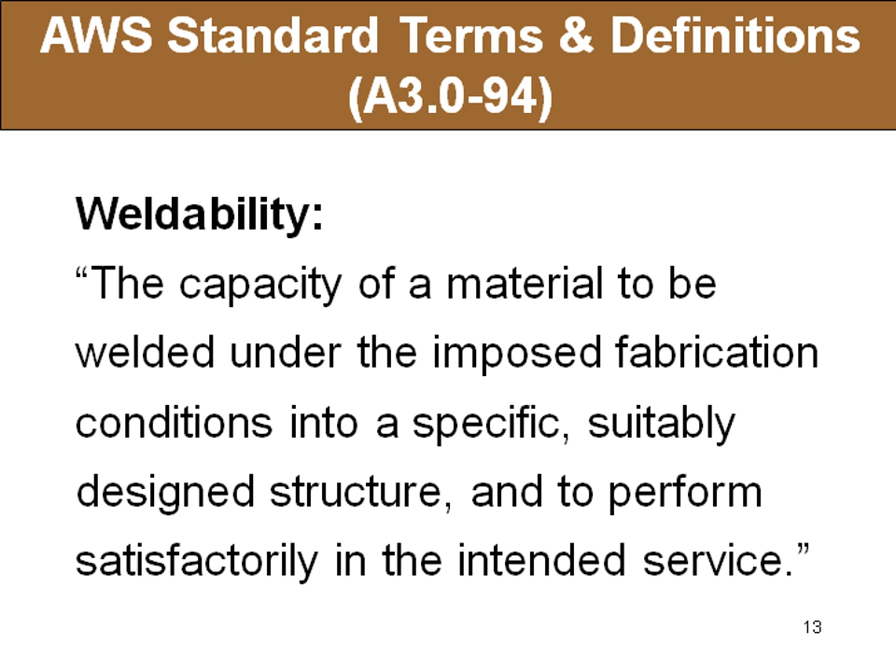The American Welding Society has a committee that writes a document called A3.0. And before I read this definition, I'll tell you I don't particularly care for it. Nevertheless, it reads as follows: the capacity of a material to be welded under the imposed fabrication conditions into a specific, suitably designed structure and to perform satisfactorily in the intended service. Now, I'd like to suggest that we usually don't add a fitness for service component into the use of the term weldability. And yet this official definition from AWS does make fitness for service part of this definition.

I prefer the definition that comes from ASTM. ASTM defines weldability as follows: a term that usually refers to the relative ease with which a material, a metal, can be welded using conventional practice. Now, with that definition in mind, let's go on and evaluate what constitutes weldability.

Now, weldability is driven by the chemical composition of the material. Carbon is a critical ingredient in determining weldability. The effect of carbon is compounded by the effects of alloys that are present in the material. Now, weldability is directly related to the term hardenability, and hardenability is a term that the metallurgist uses when defining heat treatment of a steel. And steels with high levels of hardenability are able to achieve high hardnesses very easily.

And in welding, we really don't want the steels to get to high hardenability. We prefer steels with lower hardenability. We prefer low carbon steels, low alloy steels for good weldability. So if you will, weldability and hardenability are inversely related.

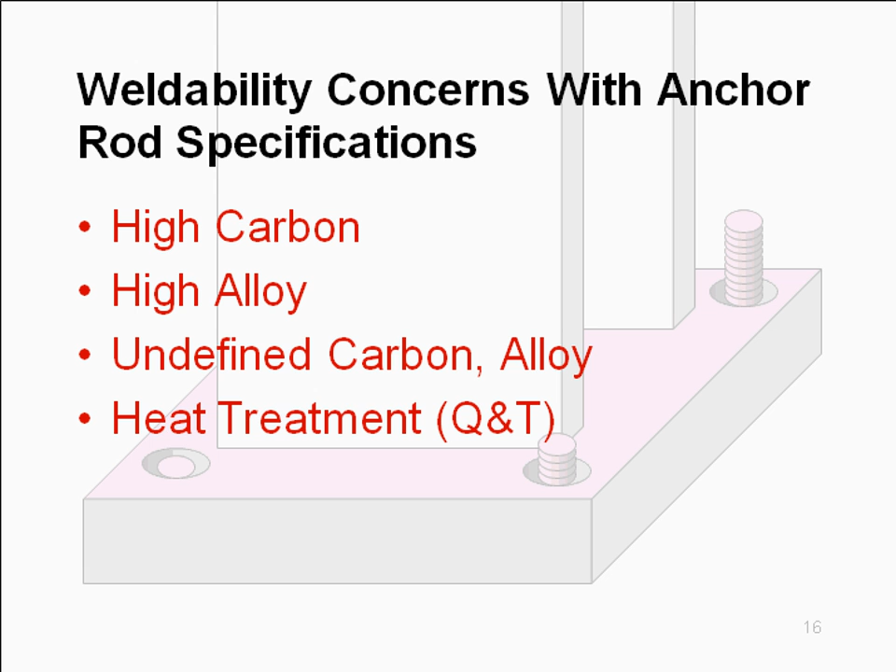Now, for today's discussion, I'm going to use F1554, which is the preferred grade for using or making anchor rods today. When you look at 1554, you'll find that there are 3 different grades of anchor listed, grade 36, grade 55, and grade 105. Now, grade 36 has a name that kind of implies it would be like A36.

And indeed, if you look at the chemistry in 1554 grade 36, it's very much like A36 steel. And you, of course, know A36 is a highly weldable material, and so you would tend to have a lot of confidence when you looked at grade 36.

However, there's a footnote, and the footnote says that for rod diameters up to 3/4 inch, the manganese content is, quote, optional with the manufacturer, but shall be compatible with weldable steel. Now remember, when we said weldability, we did not define that in terms of whether you could or could not weld the material. We decided it had to do with the relative ease with which you welded the material.

Now, this definition in the footnote talks about weldable steel. It doesn't talk about how easy it is to weld it. And frankly, I'm not sure what it means that the manganese content shall be compatible with weldable steel.

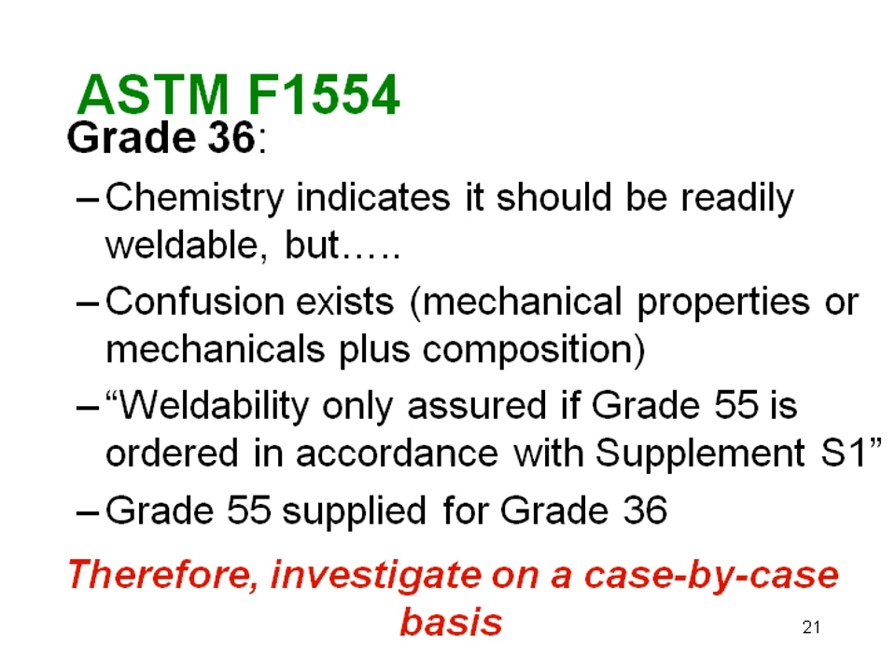When we go to grade 36, we're essentially in the same boat as grade 55, because we might have that substitution. We have no limits on chemistry. We have this note that says it's not assured to be weldable when we order it other than with supplement S1. I come to the conclusion that, once again, investigation on a case-by-case basis is required.

Now, grade 55 that's ordered in accordance with supplement S1, there I should have pretty good confidence that my weldability is going to be fine.

Dwayne, if I can interrupt real quick, we do have a question. The question is: how can material that did not have the S1 specification at purchase be checked if this is met? Oh, that's an excellent question.

To comply with supplement S1's chemical requirements, the rod could be analyzed by a materials lab to get your chemistry and your alloys. You could see if it does or doesn't comply with those limits of the specification. And then there are the carbon equivalency equations, listed in the ASTM specification, that you could calculate. By making those checks, you could find out if material that was not ordered in conformance with supplement S1 actually did, in fact, comply with supplement S1 requirements.

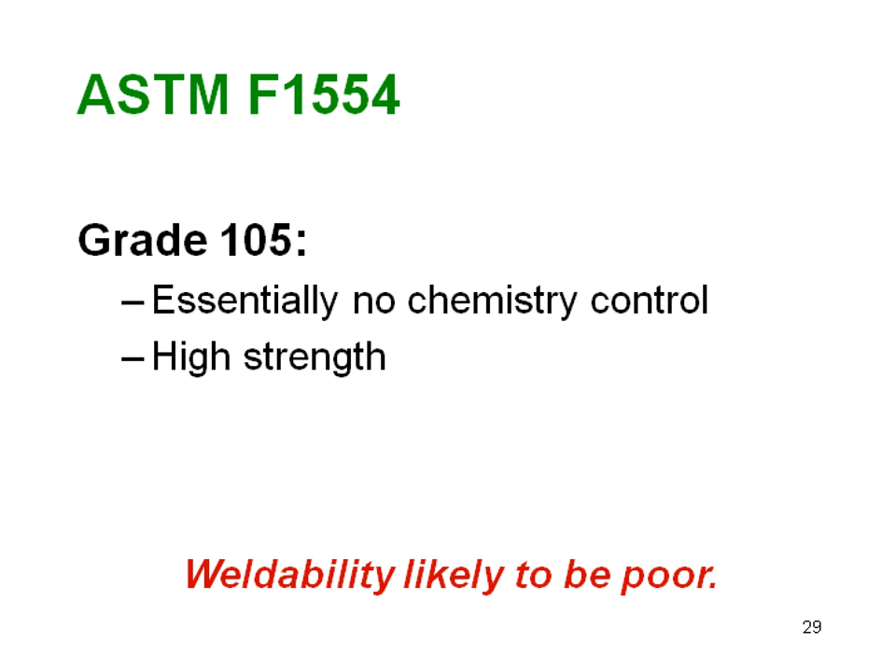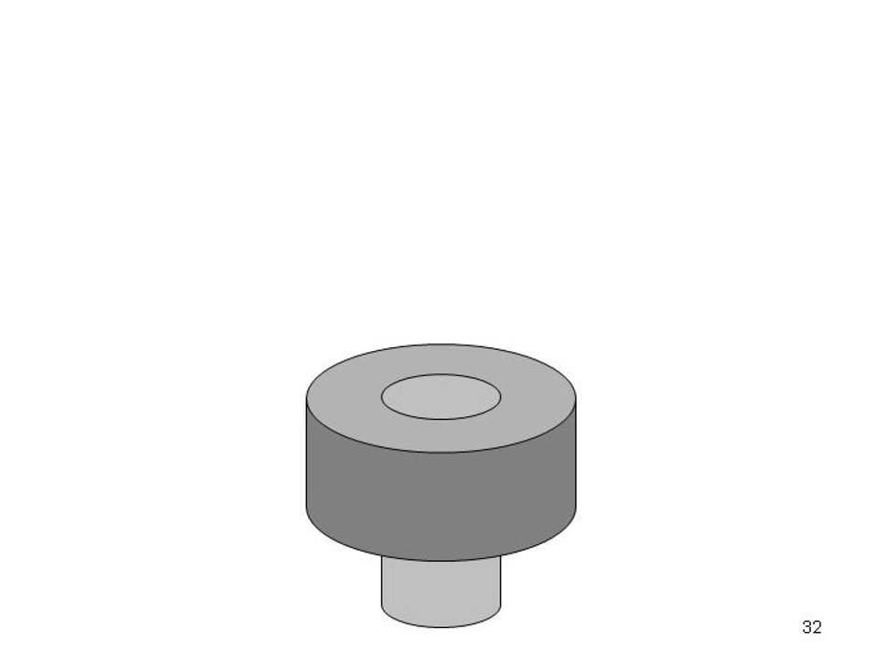We bring in the extension. Now, the extension should be selected from good weldable materials so that we don't have any problems with the extension. We take the extension and grind it to a chisel point, not a pencil point, but to a chisel point, and then bring that into an alignment.

Now, at this point in time, I think you can start to see the role that that washer or that donut's going to have. It's going to act as a support for the liquid weld metal. It acts as a bit of a starting tab and a bit of a runoff tab. And a bevel groove weld in the horizontal position is hard to make. That acts as a shelf to support the liquid metal a bit.

And so then we go in to start the welding. We weld from one side. We could be alternating sides. I'm not going to complicate the discussion with talking about welding on either side.

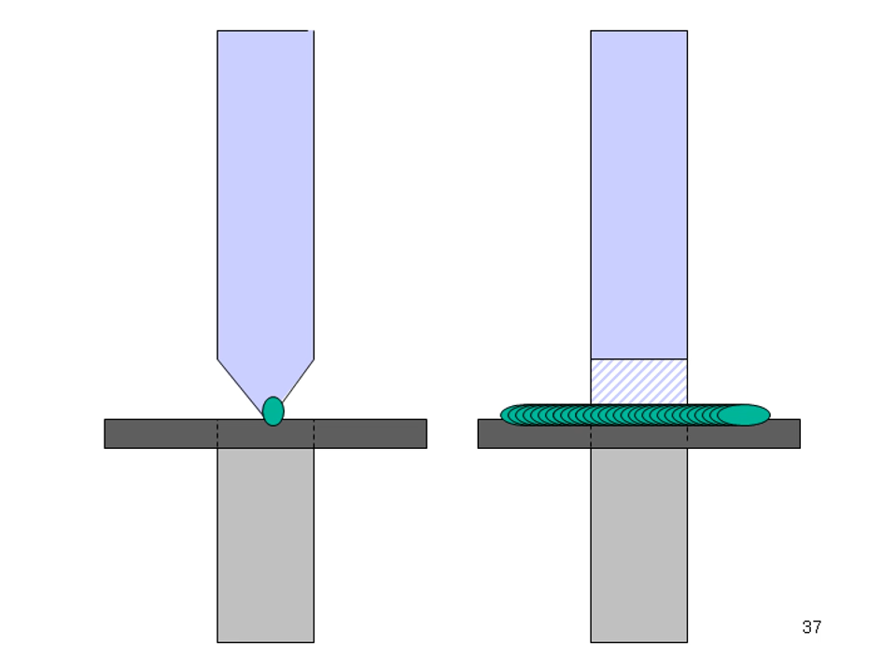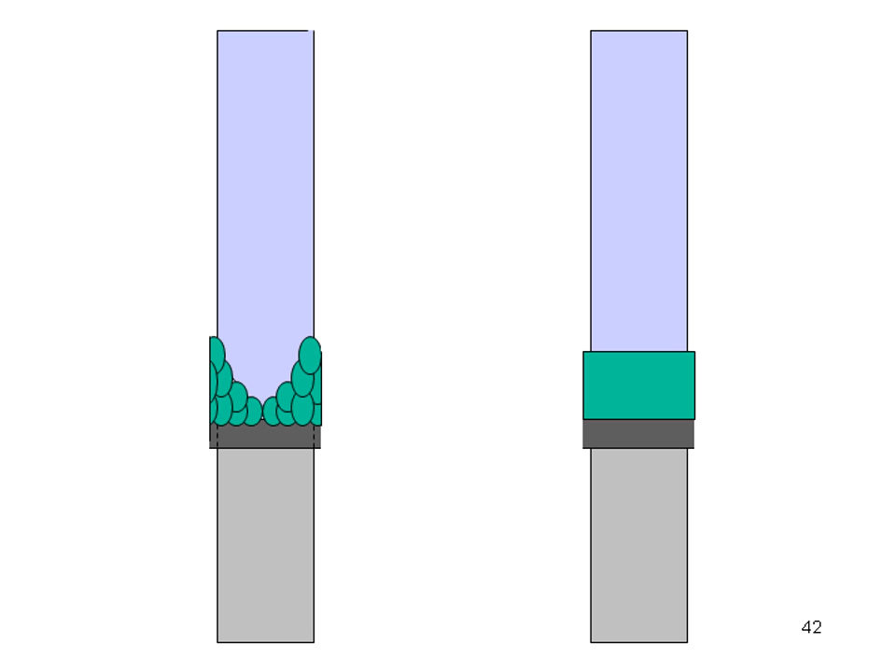Let's assume we get one side welded up. We go to the opposite side, gouge the root. This is making sure I get complete fusion across the full cross-section of the rod. Weld up the second side, and now it's time to start cutting off auxiliary pieces of steel and then grinding that flush so I get a good sound extension and I don't have any weld discontinuities, and I have a smooth surface. Well, that's how I can weld an extension in place.

Of course, it's really tempting for somebody to look over in the corner and see their welding machine, and particularly for these anchors that are too short, they want to make a plug weld. Now, we'd like to discourage that. Number one, we don't have design capacity values for plug welds in tension. We normally look at those as in shear. There would be a tremendous influence of the base metal composition on the weld metal composition, and getting a good sound weld under those conditions would be very problematic.

Of course, we had the other situation where perhaps you couldn't get full engagement of the nut in place. Once again, it's very tempting for somebody to want to get their welding machine and put a little plug of the anchor to the nut. Now, again, in the design guide, we have a segment on welding on various nuts. Nuts are usually not good materials to be welding on, and this detail would be somewhat problematic as well.

Now, having made this presentation a few times, a frequently asked question is about the other end of the rod and welding on nuts. You should know that L rods and J rods are not the preferred approach, and rather we want straight rods with a nut on the end to keep that nut from spinning off.

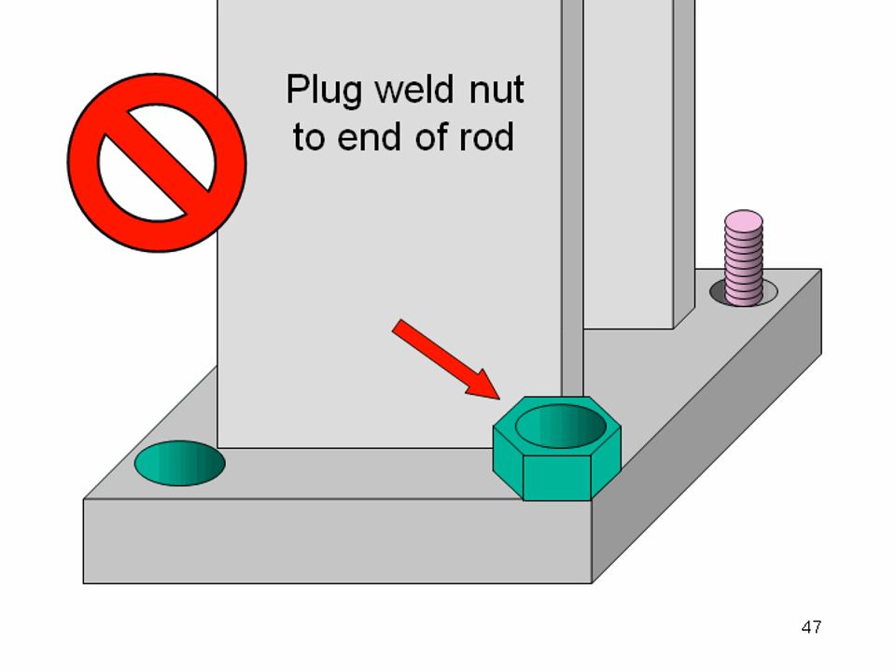Well, we're down through one topic now, and that was extending anchor rod. Now I'd like to switch to the opposite situation, and that's when people want to weld anchor rod directly to base plate. This is when we have just the opposite problem, that is the rods are not set in the concrete deep enough. Now, of course, you need to make a little investigation to make sure you have enough engagement to even get the strength out of the anchors that you're looking for.

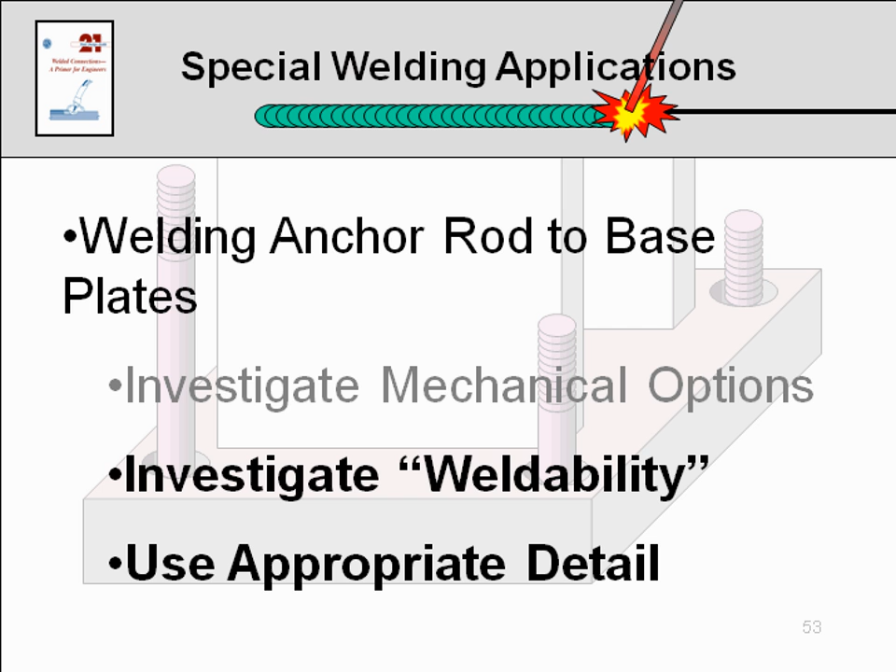And here we start the list the same way we did before, and that is investigate mechanical options. Now, in this particular case, we usually have mechanical options that we can utilize. We can put a stack of washers in place. We can make a pipe washer, if you will, if it doesn't make sense to have a big stack of washers for the connection. But if you don't want to do that and you want to go into welding, well, once again, we start the list with investigate weldability, and we're going to do that the same way as we did before.

Now, having investigated weldability, we need to use the right detail. This is typically not the right detail. Of necessity, there's a clearance between the diameter of the rod and the diameter of the hole. There will be a gap at this location. That gap is going to make it problematic getting a good weld. Predicting the weld throat with gaps is a little bit more of a challenge.

Rather, we'd like to suggest a detail that looks like this. Now, once again, we've cut a donut out of a good, high-quality steel that's easily welded. We've made the ID precisely the same as the anchor rod, so we have a good, tight fit of that donut to the anchor, and now we can put a weld around that location without problem. Now, there's no need to weld the donut down to the base plate. There might be some temptation to do so, but we're just going to be transferring some restricted loads through that connection, and we don't really need to tie all those components together.

Well, having gotten through the anchor rod, I think we have a question on anchor rod. Yeah, before we move on, the question was, what if the welded area of the extension is where the nut needs to end up?

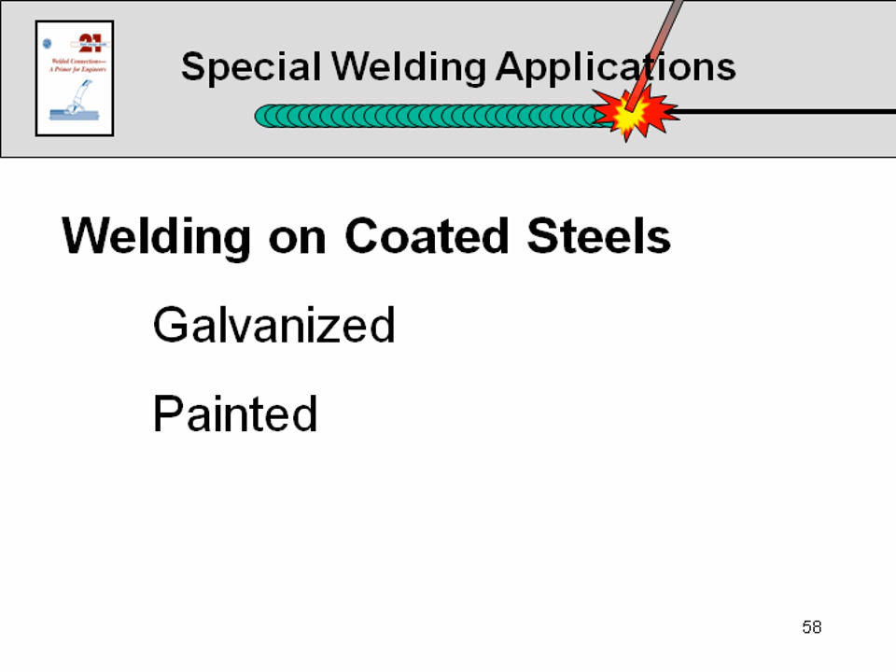Before we go into more detail, let's look at what our specification already says. If you look at the banner at the top, this is right out of the 13th edition, the 2005 spec, the Joint ASD-LRFD specification. When I look up the topic of shop painting, I read: unless otherwise specified in design documents, surfaces within 2 inches of any field weld shall be free of materials that would prevent proper welding or produce objectionable fumes. Now, if I go to section M4, I read this: shop paint on surfaces adjacent to joints to be field welded shall be wire brushed if necessary to assure weld quality.

Let's see what AWS D1.1 says on this issue, taken up in section 5. 5.15 reads as follows: surfaces to be welded and surfaces adjacent to a weld shall be free from loose or thick scale, slag, rust, moisture, grease, and other foreign material that would prevent proper welding or produce objectionable fumes.

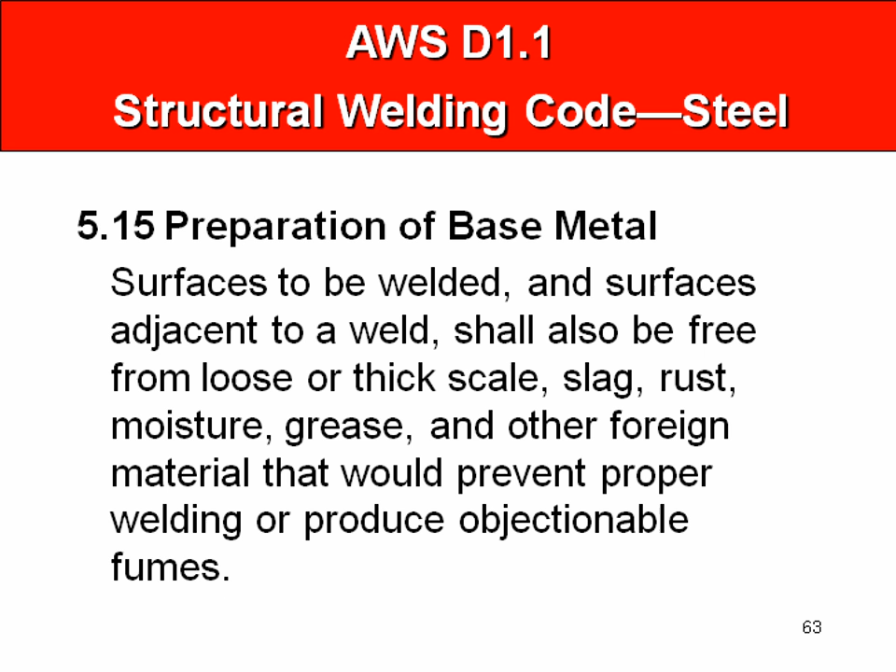Now, most of our specifications and provisions deal with input requirements. We say that the steels can be of these grades, the filler metals can be of certain grades. What you don't find here is paint of a certain mil coverage or galvanizing of a certain mil coverage can be welded on without concern. You don't see a requirement that says if it exceeds this level, you have a problem, you've got to remove it. Rather, what we're looking at is outcome-based criteria which says if the weld quality is affected, you can't do it.

Now, this practically means you make a weld and you inspect it to see if it's okay. And if it's not okay, you're going to have to do something different. And if it's okay, you go ahead with it. That's what I mean by outcome-based criteria.

Now, there is this ongoing discussion about safety. In Design Guide 21, there's a brief chapter 15 on weld safety. The most important thing contained in that chapter is a reference to Z49.1, the ANSI standard on safety in welding and cutting and allied processes. You can obtain a free copy of Z49.1 by going to the AWS website, aws.org, and download it to your hard drive.

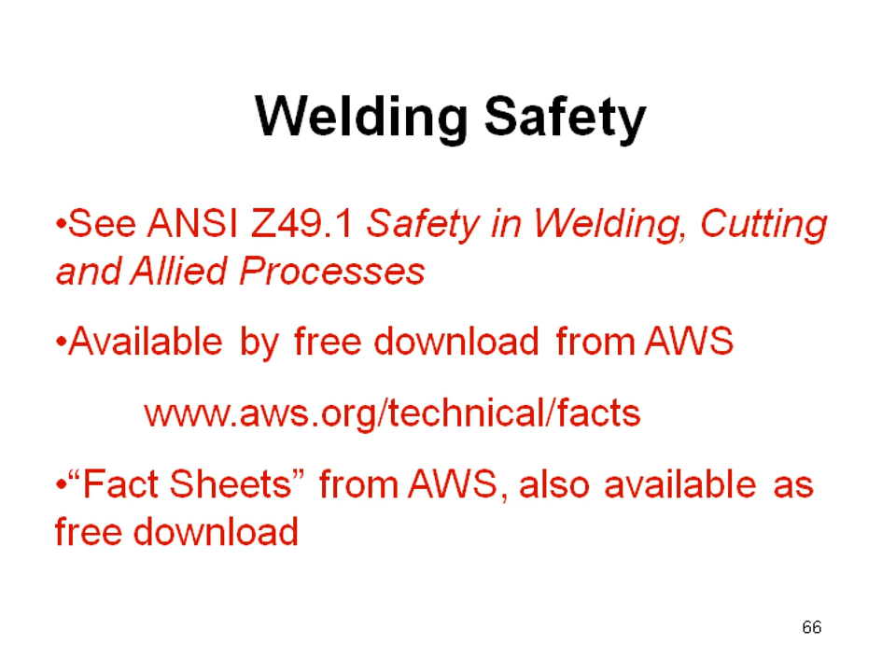For example, fact sheet number 1 addresses welding fumes and gases. The next fact sheet here happens to be fact sheet 25, which deals with the topic of metal fume fever. If you read with me, you'll see that metal fume fever is an illness caused primarily by exposure to zinc oxide fumes in the workplace. The main cause of this exposure is usually breathing fumes from welding, cutting, or brazing on galvanized material.

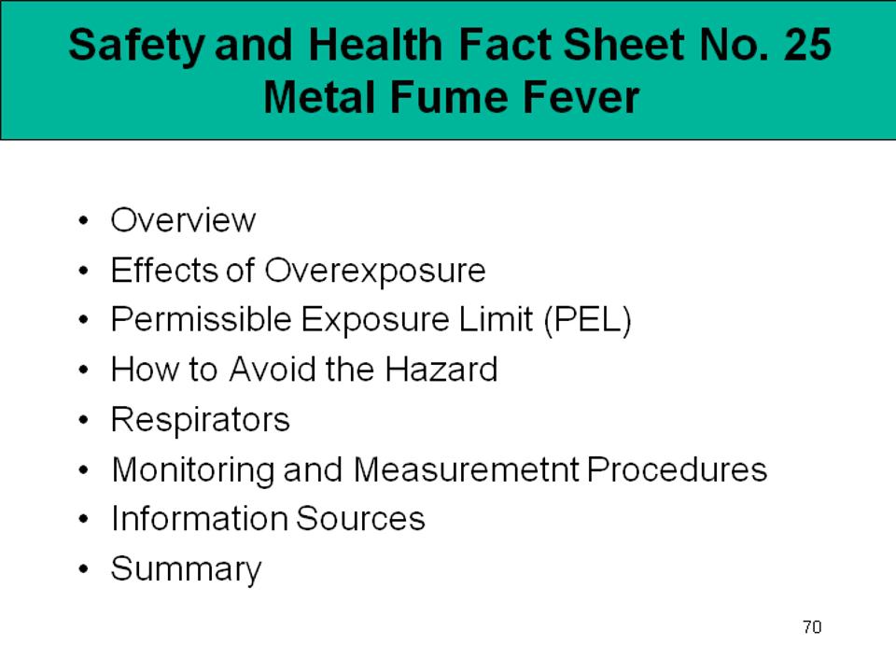The point here is if we're welding on coated materials, if you're welding on galvanized materials, here are some sources of information to address the welding fume side of the discussion. The American Welding Society's fact sheet 25 outlines the material covered in that document and gives some good, helpful information. This is the same information I just read, but perhaps in a format that's easier to digest. Practical advice is given.

Keep your head out of the fumes. Don't breathe the fumes. Use enough ventilation. Exhaust the arc to keep fumes and gases from your breathing zone and the general area below any limits. It also gets into TLVs, material safety data sheets, and those kinds of issues.

I'd like to switch gears now and go back to the issue of weld quality, but I guess before I do that, we have another question. One question that came in is: what are some possible solutions to inspecting welds once they've been painted over?

The question is how do we address the issue of welds after they've been painted over. I politely want to say that's really not what we're talking about here. We're talking about painted surfaces and welding on those painted surfaces. D1.1 will tell you you need to inspect the welds, and I think you'd find the implication there, if not a specific statement, that you're going to inspect them before it's painted over. You really should be inspecting it before it's painted. I would expect that heavy paint could mask discontinuities.

In fact, I've seen a couple of projects where we had products that were actually dipped and had a very heavy layer of paint over the welds that made inspection impossible. So there may be some paint removal that has to be done in order to apply a good visual inspection. Okay, I apologize, Dwayne, I think I may have misstated the question.

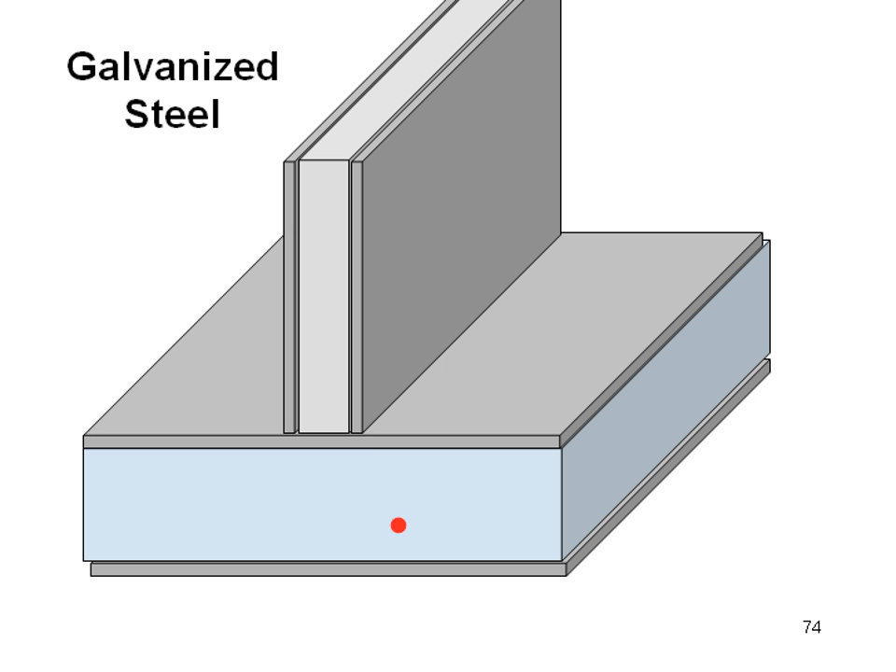This illustration is trying to show a piece of galvanized steel, and I've tried to use different colors to show that the virgin steel is underneath this coating of galvanized. When I go to make a weld, it is possible on a very heavy galvanized part to fuse the weld metal to the galvanized coating, but for the weld to actually not fuse to the steel. If that's the case, the strength of the connection is dependent on the strength of the galvanized coating, and that's not what you want to do for the design of your elements. That's not what we've assumed. So you have very little strength if you're not penetrating through the galvanized coating.

I'd like to suggest that's probably less of the problems, a less frequently encountered problem. The more likely problem is that you will have extreme porosity in the weld. When you heat the galvanized coating, it actually sublimates, going from a solid to a gas.

If you've ever welded on galvanized material, there's a lot of fume that's generated, and that fume percolates through the weld. If it solidifies while going through the weld, you can end up with holes in your weld. Now, for structural applications, we do have acceptance limits for porosity. We're allowed to have some. We're not allowed to have a lot.

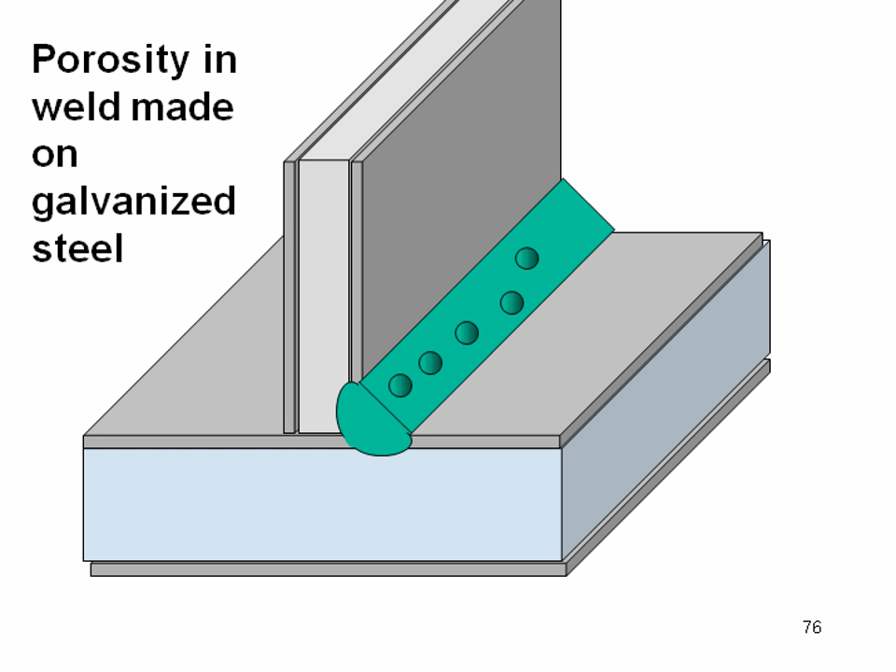And so that may be one of the problems you encounter. The other problem is that you may introduce zinc into the liquid weld metal. If you do that, the zinc with a different melting temperature may segregate during solidification and cooling. It may go to grain boundaries, or it may go to the center line of the weld, and we could get into a crack.

Now, cracks are the worst thing that we have when we try to make a weld. And so we need to preclude the cracking tendency in particular.

Now, the American Welding Society has a publication that's now obsolete, D19.0. It was last updated in 1972. I don't know if it'll ever be updated again, but in this publication is a list of factors that affect cracking tendencies on galvanized steel. The factors include the silicon content in the weld metal, the degree of penetration of the weld beyond the root, the thickness of the base metal which affects restraint, the coating thickness of the zinc, and the microstructure of the zinc coating. What I take from this list is there are a lot of things that affect cracking tendencies.

Nobody said our job was going to be easy, but we have a lot of variables now that we have to deal with. So I want to be practical. I want to give you some good information because you have a job to do, and you have a structure that's going to be galvanized, and you need to weld on it, and you want to be certain that you're going to get the strength out of the connections you're looking for. So here are my suggestions for critical applications.

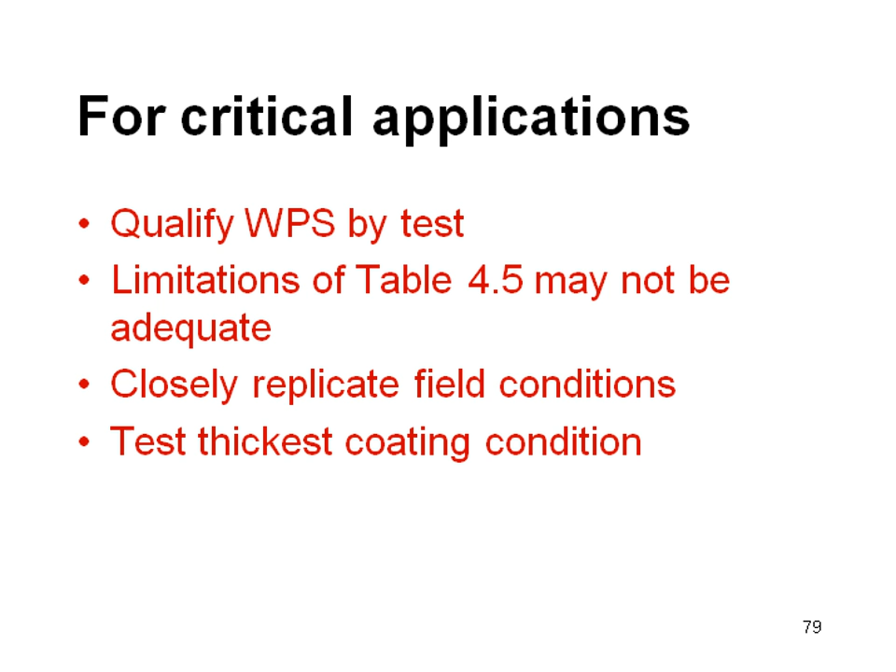Well, I'd like to move now on to our fourth topic, and that's welding on heavy shapes or on heavy sections.

Some of you know about the project and the cracking that was experienced at the Orlando Civic Center in the late 70s. These were not service loads. The truss, which was made with a chord that was a very heavy jumbo section—of course the bottom chord is in tension—and for the convention center, it spans quite a length because you want column-free convention floor space. While this structure was being erected in the middle of the night, one of the chords fractured.

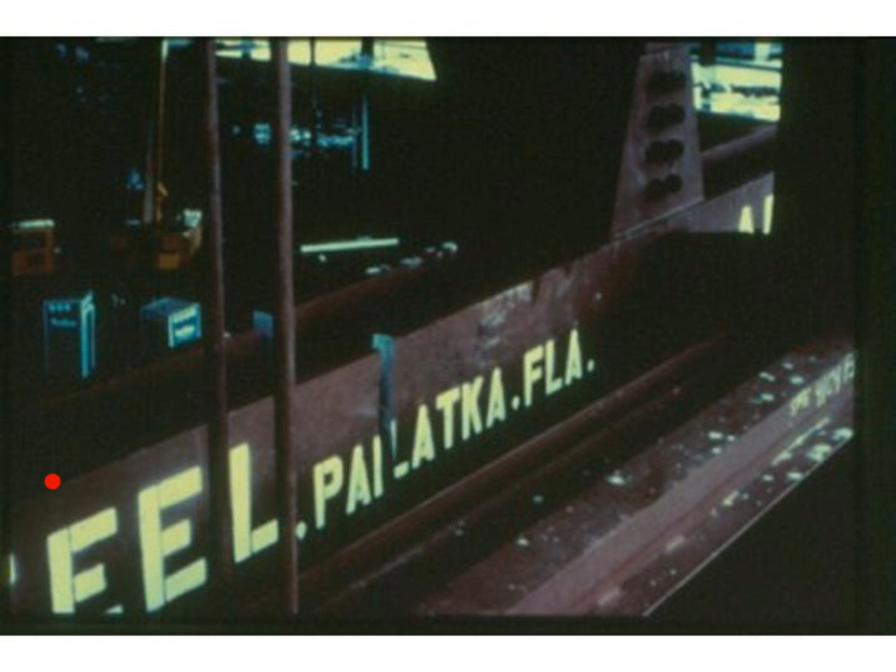Now, the first thing I'd like you to notice is that the weld itself did not fracture. This cracking is occurring in the base metal. Admittedly, it's cracking that's welding related, but we need to make sure that we start by understanding that it was the base metal that was fracturing.

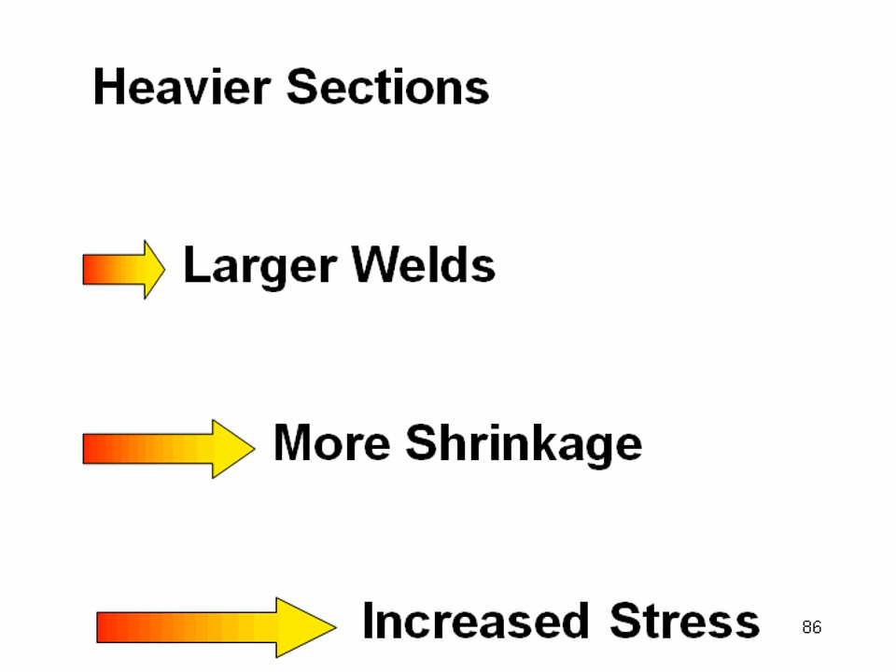Now, when we start welding on these heavier sections, what happens? Well, we start making larger welds. Larger welds have more shrinkage. The increased shrinkage means we're going to have more residual stress in these connections. Heavier sections are also more highly restrained. The higher restraint is going to create more triaxiality, and as we're going to see, more triaxiality leads to less ductility.

Finally, as I'm dealing with heavier shapes, the materials themselves change. There's less rolling associated with making the heavier shapes. They cool more slowly since we have thicker flanges and thicker webs, and that may lead to lower notch toughness. Notch toughness is typically measured with a Charpy impact test—that's not the only way we can measure it, but it is a measure of the resistance to brittle fracture when we have a pre-existing crack in an applied or residual tension field. So these are the things that make welding on heavy shapes more of a challenge.

Now let's take a look at the cross-section of one of these shapes. The steel for the Orlando project, that was about 30 years ago, was ingot-based. Most of our steel today is continuously cast steel, so some of these details are a little bit different from current steel production practices.

When you poured an ingot, the low melting point constituents, including carbon-rich regions, would segregate toward the center. Now, when you went to roll out the shape, what was in the center of the ingot always stayed in the center. As a result, in our cross-section down through the center, there would be a core region that typically had higher levels of carbon.

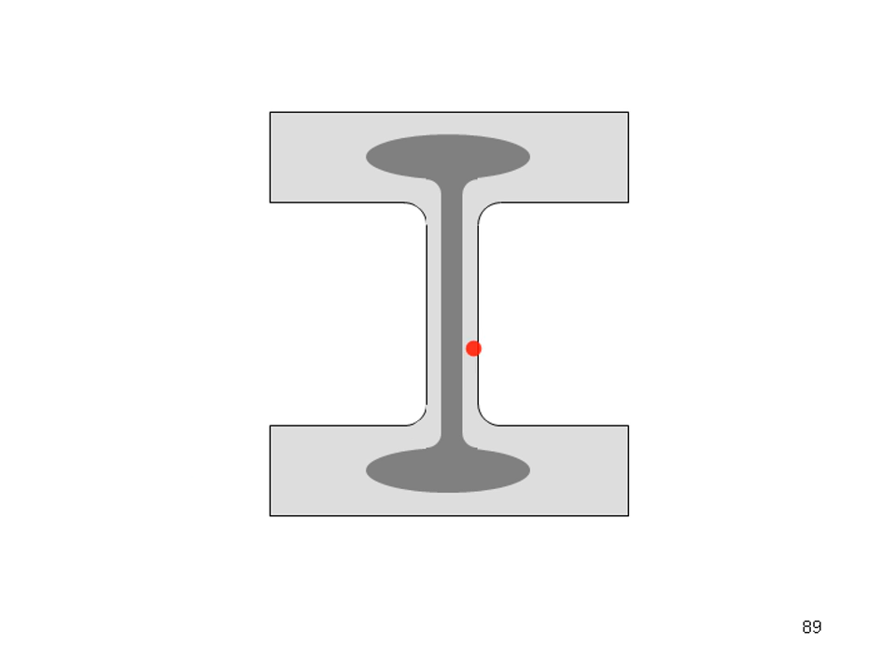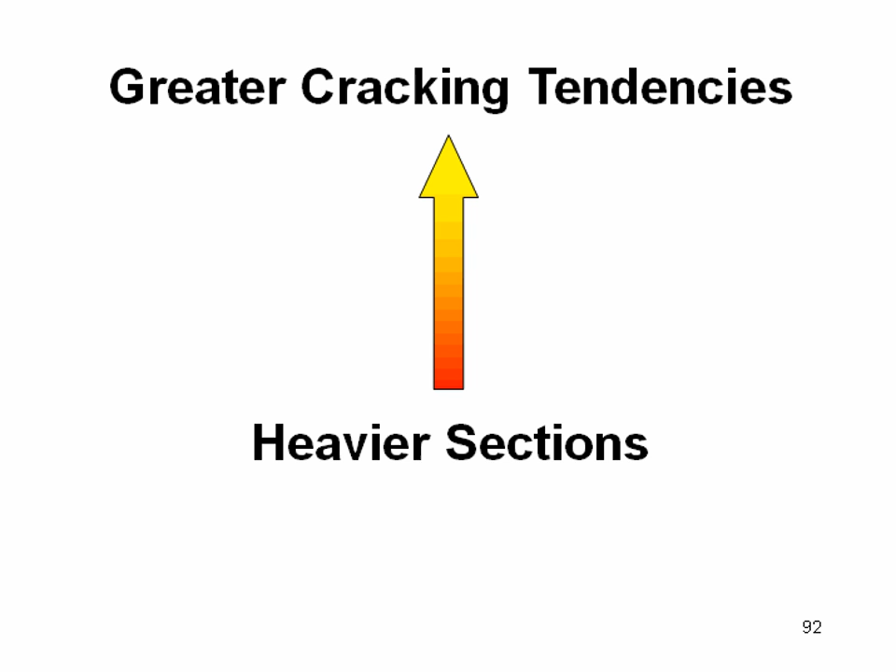For these reasons, and perhaps more we haven't identified, when we get to heavier sections, we have a greater cracking tendency. That's consistent with your experience, I suspect. When you're welding on heavier steel, you're more likely to see cracking than when welding on lighter weight material. Now, when we're talking about cracking, we are talking about a fracture problem, and fracture is controlled by fracture mechanics.

Fracture mechanics primarily relates three variables: the fracture toughness of the material, the applied or residual stresses, and the presence of a crack, its orientation, and its size in the member. So we have three primary variables to deal with to avoid fracture. We want to optimize the toughness, and minimize the stress and crack size in order to preclude fracture. So let's start by looking at fracture toughness, the things that happen negatively if we leave them alone with the jumbo sections, and what AISC has imposed to help mitigate those concerns.

We already talked about this jumbo section in the cast core region. If you were to order this steel back before Orlando, and if you asked for toughness, the specimen would be taken away from the tips of the flanges. This is simply because that's an easy way to extract the specimen. But if you test out in this region, notice you're not getting the properties of the core region.

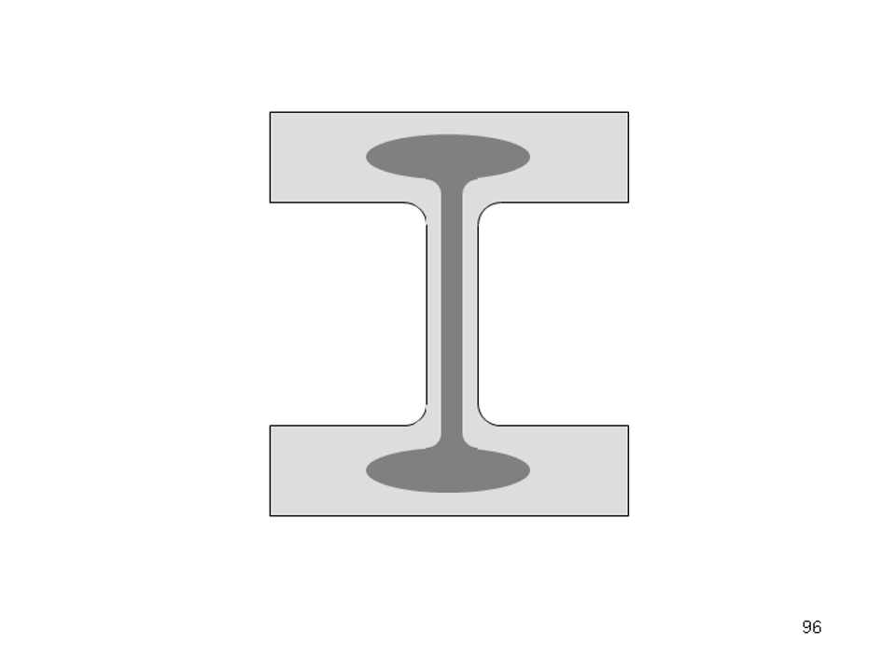Now, these shapes have been successfully used for column applications for many years. This large cross-sectional area became very inviting to designers for tension members, specifically for trusses. So why is it we successfully welded this when it was in compression, but it became problematic in tension? Well, let's look at a tension splice.

In order to make a tension splice, I would normally cut weld access holes, which allows me to place the backing in place. Of course, I have to bevel the flanges in order to receive the weld metal. Normally that kind of working is done with thermal cutting processes, and what I want you to see is that I'm thermally cutting on the flange area, some of the web to flange area, and even the cutting process is introducing residual stresses, and I'm working the steel, including the core region. Now, when I go to weld on it, I'm going to be welding into that core region as well.

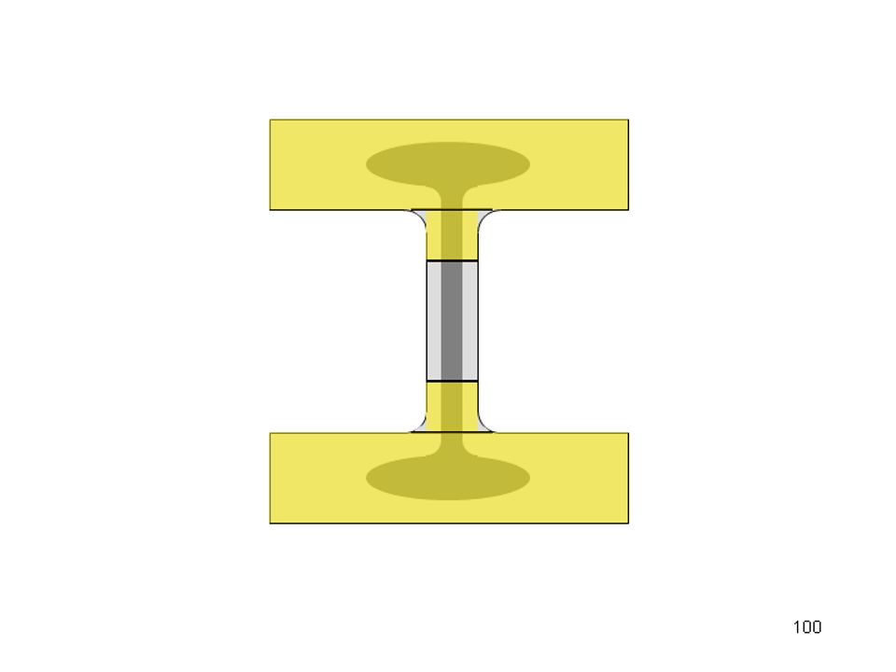Let's contrast that with a typical column splice. I realize that sometimes wind loads require complete joint penetration groove welds of column splices. Seismic concerns may do that as well. But there are many applications where we don't need to develop the full tensile capacity in a column splice. So we may have a detail, like I'm showing here, welded onto the surface of the steel of the web.

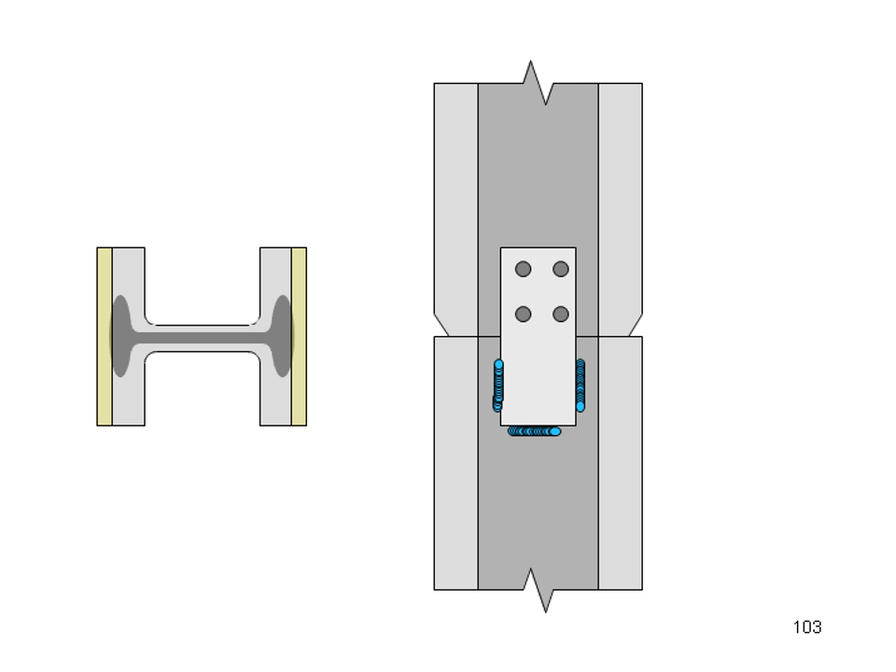and then bolted as an erection aid in the field. Notice these welds would never be made on the core area of the shape. And then for the partial joint penetration groove welds, I would have a bevel, but that bevel may not go into the core region of the shape. So it's very conceivable, and in fact, experience showed that we could come up with compression welded connections on these jumbo shapes, and we had no problem.

But when we came up with the detailing necessary for a tension joint, we started to see some of these cracking tendencies. One of the things AISC imposed, in the mid-'80s, as these requirements started to come out, knowing about this low toughness core region, and knowing that the ASTM location was on the tips of the flanges, AISC imposed a new requirement for these jumbo sections: that the CVN specimen would be taken out of this worst case location, the center line of the shape, and T/4 into the flange.

Now, of course, that's a more complicated area to extract steel from, but that became the required test. Eventually, that became a standard ASTM test - that's supplement 30, which is to the ASTM A6 specification.

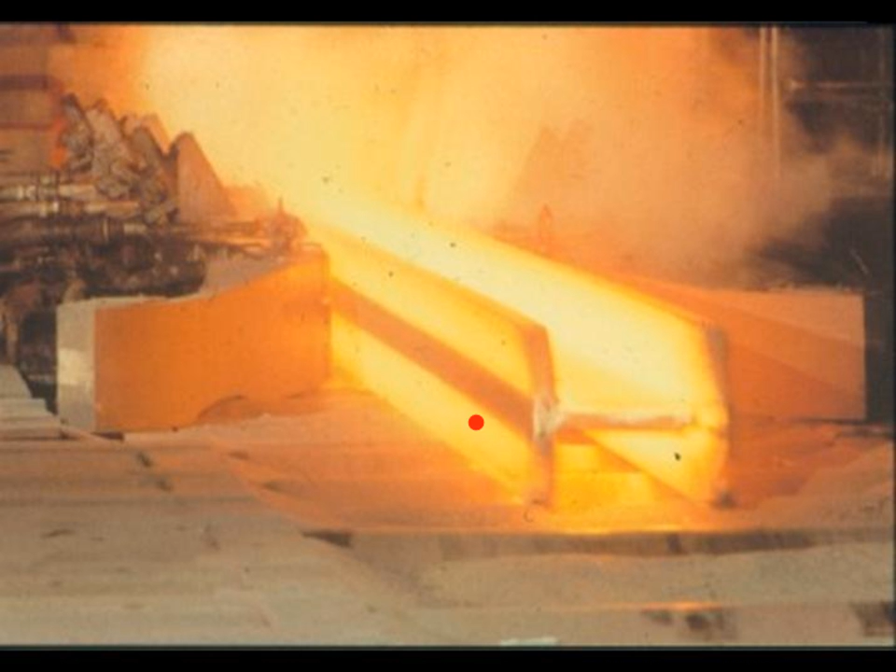And out of that region, there was a requirement that the steel exhibit at least 20 foot-pounds at 70 degrees F. Now, that caused the steel producers to have to produce the steel differently in order to get the properties out of that location. And here is a new shot of the steel being made where they're artificially cooling that web-to-flange interface to ensure appropriate properties at that location.

Now, the Orlando problem started out as shapes, but eventually the same provisions were applied to plate. And when the plate exceeded 2 inches, when you had a tension splice, we had the same requirement of 20 foot-pounds at 70 degrees. There needed not be a different location for that because that zone would pass all the way through the plate.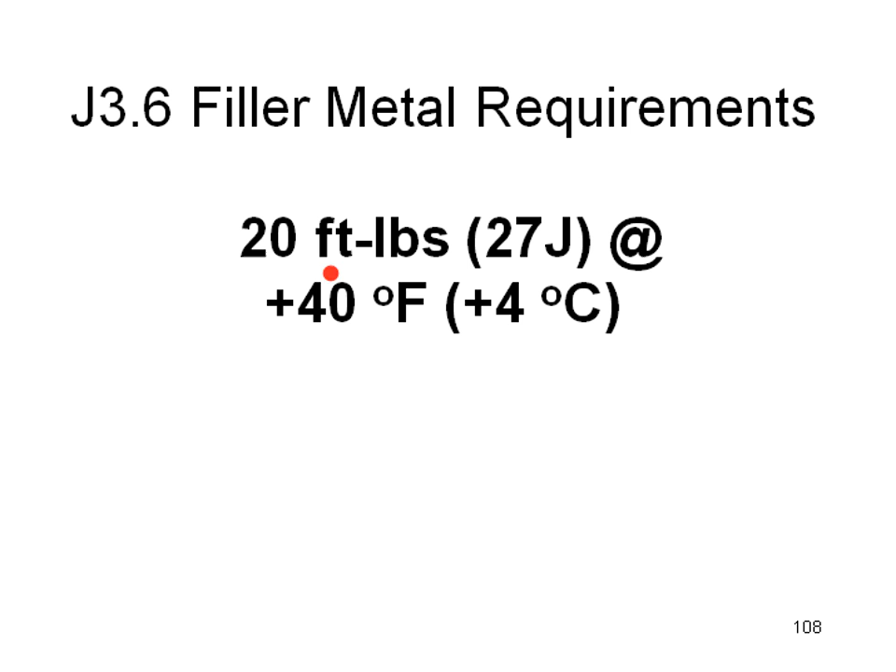Eventually, filler metals were required to also have higher notch toughness. Remember, the Orlando case didn't involve cracking of weld metal. But once we start improving the system, increasing the toughness of the steel and other provisions that I'm going to discuss with you, then the same kind of magnitude of toughness, 20 foot-pounds at 40 degrees, was imposed on the weld metal. Now, that helped increase the fracture toughness.

What can we do to mitigate or minimize stress? And we want to remember that this is the residual stresses of welding, not service loads, that drove this cracking.

Well, here we have a CJP groove welded splice of one of these heavy sections. Now, of course, we provide the weld access hole that allows us to put backing underneath that top weld. It allows access for welding through the full width of that flange. But it turns out weld access holes do more than just that.

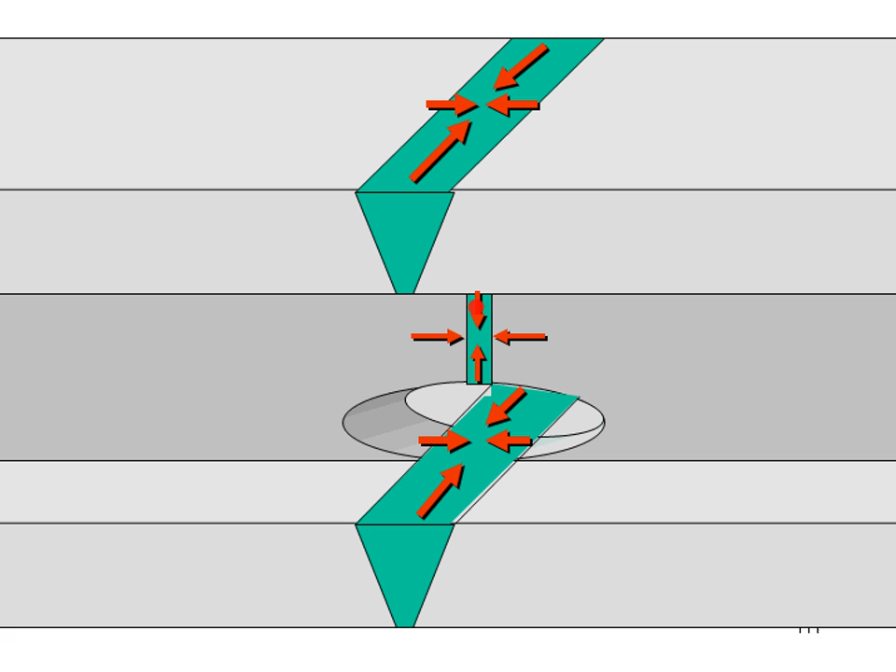I'd like you to think about the shrinkage that those groove welds make. This groove weld, the groove weld down below, will shrink transversely. It shrinks longitudinally. The web weld shrinks transversely. It shrinks longitudinally. Now, I want you to envision a cube of material right on the edge of a small weld access hole. So that's what we have here.

Now, there's a wonderful little book that was written in 1941 by Dr. Max Gensamer. And Dr. Gensamer said this: 'This is an important concept and needs to be emphasized. No shear stress, no plastic flow or deformation.' Now, what Dr. Gensamer is telling us is in order to get plasticity, in order to get ductility out of our materials, we must have shear stresses present.

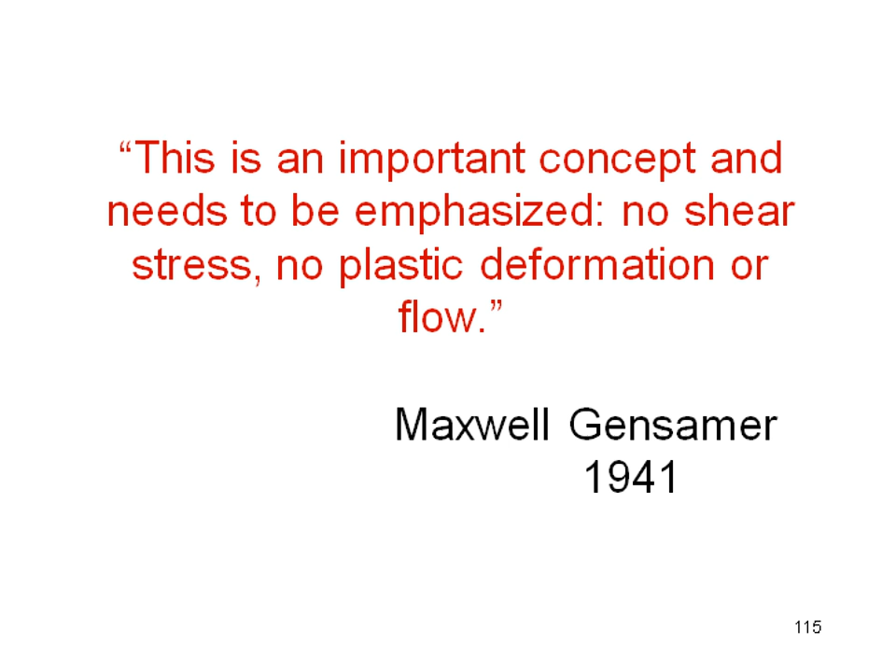And some of you may recall when you were taking a course in materials, it's along that 45-degree plane that we have the maximum shear stress, and the atoms of material move one with respect to each other along those 45-degree planes. Now, perhaps you, like I, learned about ductility with a standard tensile coupon. And you know that as you pull that member in tension, along those 45-degree planes, you get a maximum shear, and the materials start to slide along those 45-degree planes. They concentrate in a localized area, and we called that necking, didn't we?

I think it's a little bit of a shame that engineers think about testing and coupons when we think about necking, but that's a subject for another discussion some other day. Nevertheless, we get this localized reduction that eventually ends up in fracture, and we get elongation out of our specimen.

Now I'd like to go back to something you probably haven't dealt with since you were in school: Mohr's circle of stress. What I've drawn here is that uniaxial tensile coupon.

Associated with this force, we get a stress, and we plot that as sigma 1. There's another force involved in the system, in the vertical direction. It happens to be 0, and we plot that as the second stress field. There's a third stress field, also 0, that's stress in the direction of the screen. We draw a circle between sigma 1 and sigma 2. Associated with sigma 1 and sigma 2 is a shear stress, tau 1,2.

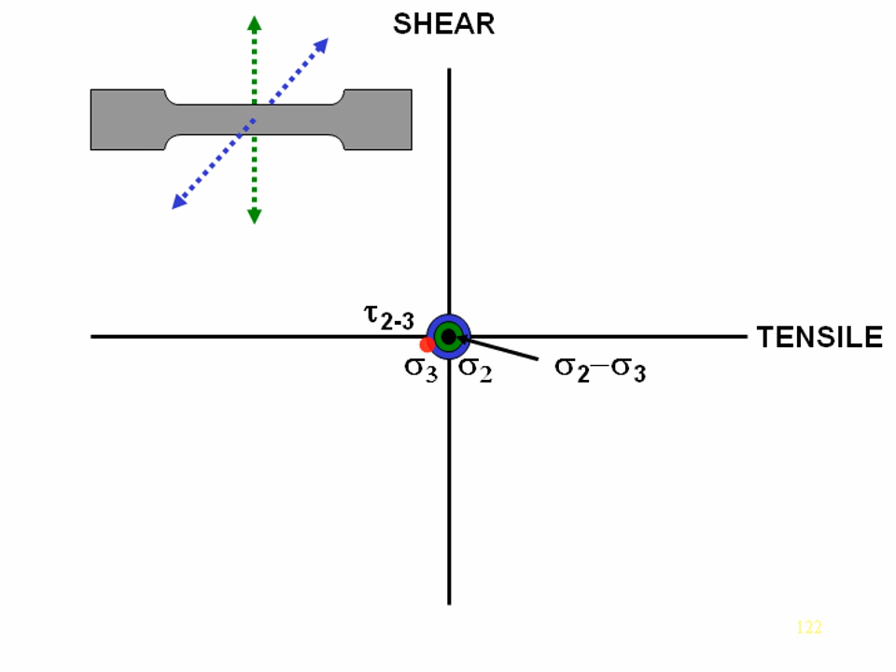There's also a Mohr circle of sigma 1, sigma 3, which creates shear stress tau 1,3. Then there's a third Mohr circle of stress, sigma 2, sigma 3. It shows up as a dot. There's a shear stress, tau 2,3, associated with it, and it happens to have a value of 0. So I hope you see 3 Mohr circles of stress: sigma 1-sigma 2, sigma 1-sigma 3, and the dot, sigma 2-sigma 3. Two shear stresses with a positive value, one shear stress with a value of 0.

Now, if I increase sigma 1, my circle gets bigger, and my shear stresses start to increase on shear planes 1,2 and 1,3. Of course, 2,3 doesn't change — it stays at a value of 0.

If I increase my stress even further, I finally get out to what I call the yield strength of the material — even though that's an unfortunate use of terms. Associated with that yield strength stress are shear stresses that exceed the critical shear strength in the material. It's because these shear stresses exceed this critical shear strength that I finally get some deformation. Along the 45-degree planes, because I've exceeded the critical shear strength, these shear planes start to exhibit yielding. We call it yielding, but what's physically happening is I exceeded the critical shear stress.

Nothing happens on 2,3 because it's still 0. Now let's look at the shear planes first — the shear planes of 1,2. Here's the shear plane that's inside the material, and perpendicular to that, I have another shear plane. At a 90-degree orientation, I have shear plane 1,3, and perpendicular to that, another shear plane. Those are the 4 sets of planes on which I start to get plastic deformation and flow.

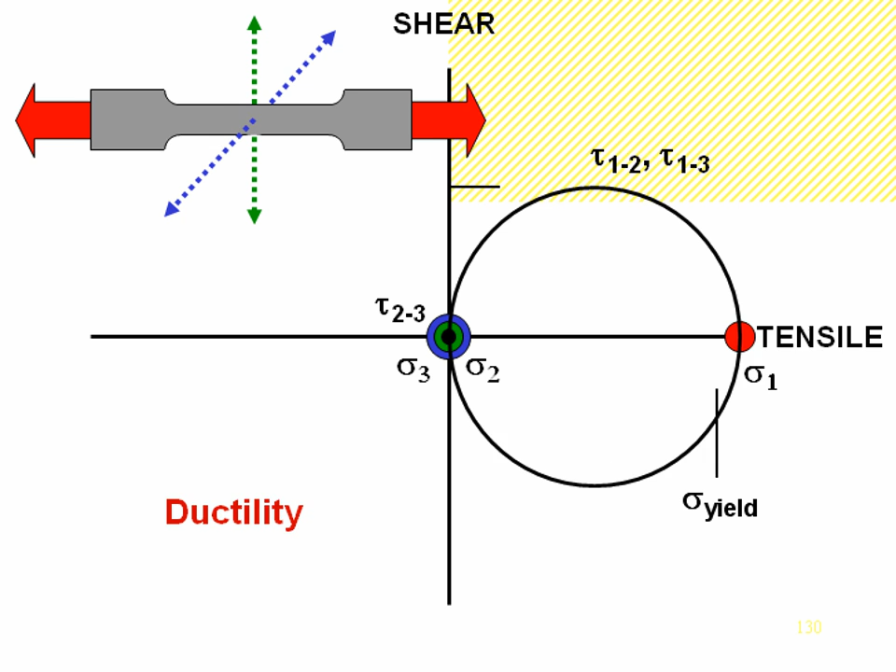Now let's increase our stress, sigma 1, even further. We're clearly into this area where we can now exhibit ductility. If I increase my stress even further and get out to the tensile strength capacity, I start to get necking in this area. I'm getting a lot of deformation along these shear planes. I've experienced ductility. I increase load a little bit more, and bang, this thing breaks — I experience fracture. This should be simply a reiteration of what you learned about Mohr's circle and in materials lab, and it explains that tensile coupon we started with.

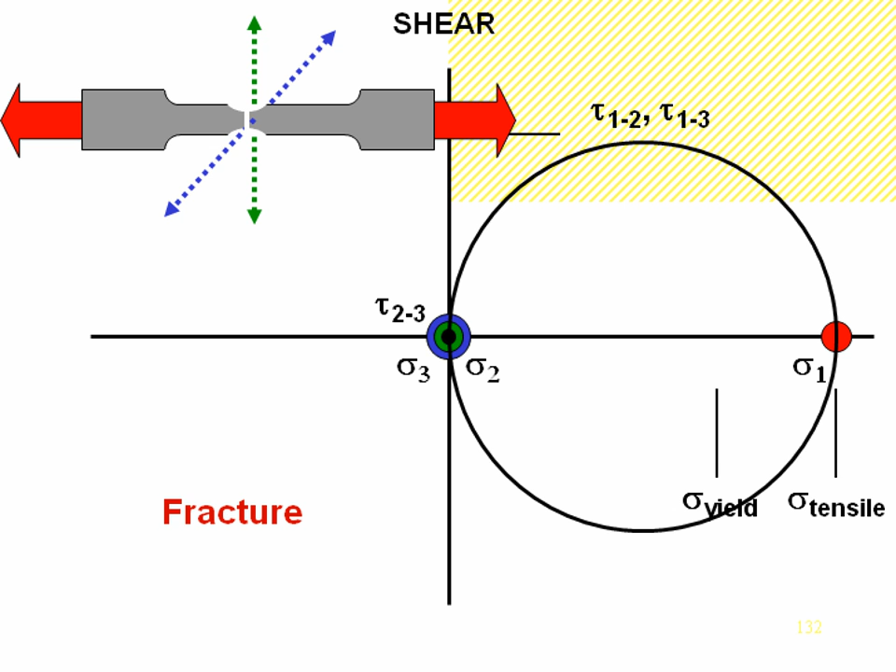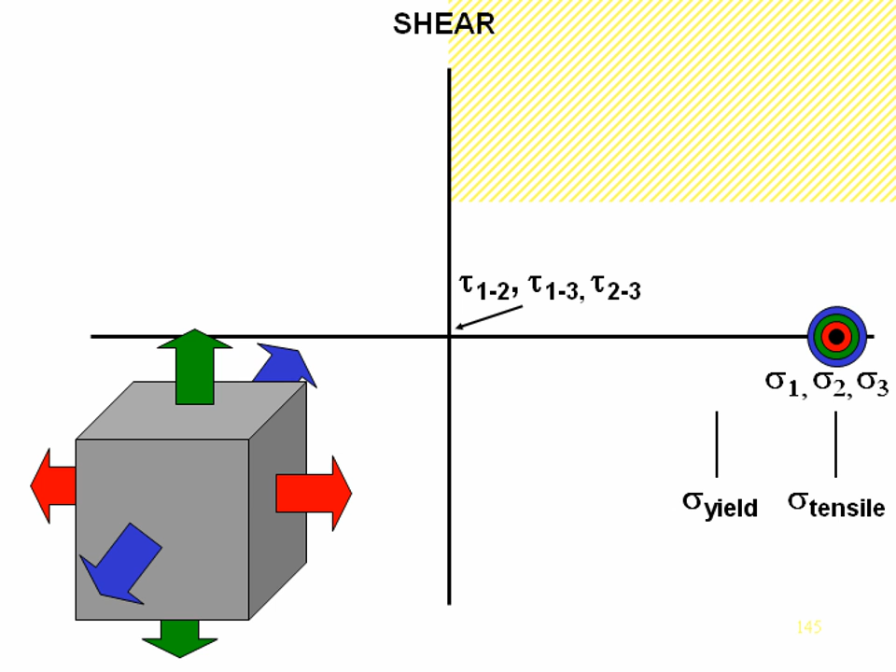Remember, in Orlando, the cracking was occurring near the weld access hole regions, probably in areas where we had some workmanship defects. Now, here we have a beam-to-column connection, a very small weld access hole. Notice the access hole is terminating in an area of residual tension stress. Now I apply some service loads, and I have biaxial stresses. I have some shrinkage loads from a groove weld of the web. Now I have triaxial tensile stresses, and where I might have a workmanship defect, well, it's right in these triaxial stresses, and I don't get any ductility out of those stress conditions.

Now, what if I terminated that hole out here in an area of residual compressive stress? Surrounding the residual tensile stress is always a compressive stress. If I terminated this access hole in that region, now I'm adding in some compression, and when I put compression in the system, I had much more ductility. Now, around that workmanship defect, I'm more likely to get yielding to accommodate those shrinkage strains rather than fracture.

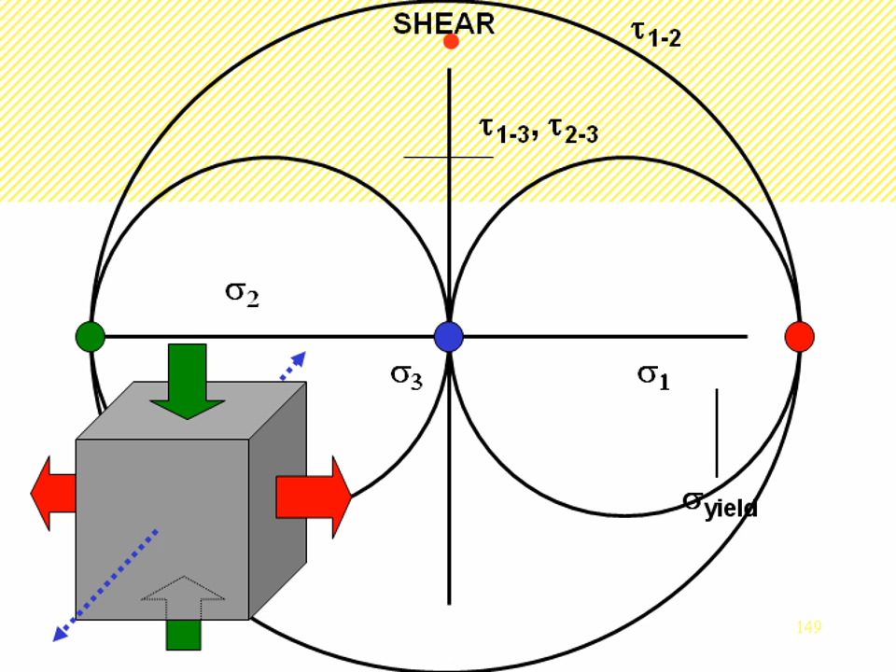Now, that's part of the logic that was imposed when the weld access hole sizes were increased back in the mid-'80s. You don't need an access hole this big for access for welding. These bigger access holes were to preclude the interaction of the residual stresses from the groove weld of the web and the groove weld of the flange.

Now you see the dimensions here where the height, h, needs to be 1.5 T sub W, not less than 1 inch, doesn't need to exceed 2. The width here is 1.5 T sub W, T sub W, of course, being the thickness of the web.

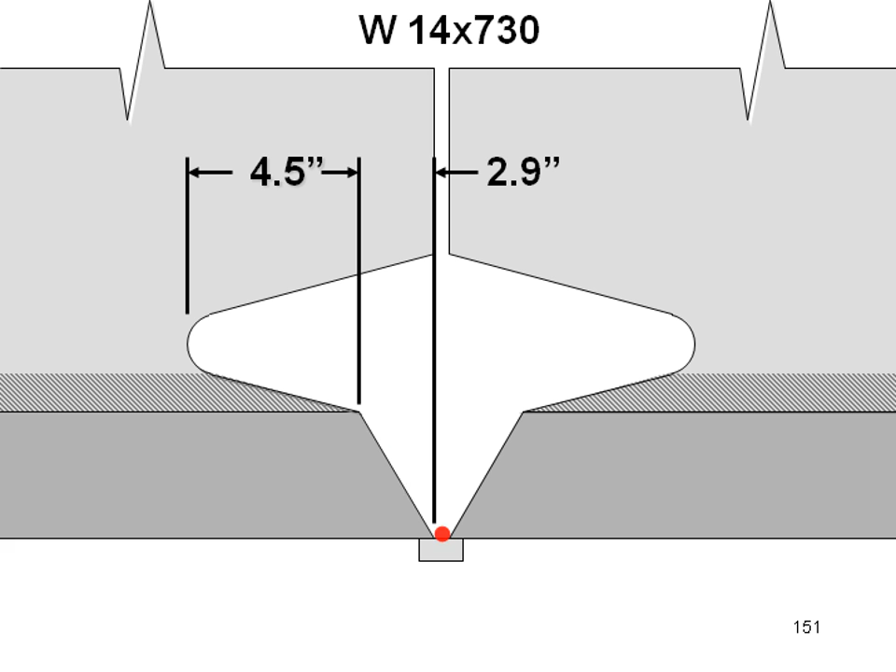So now let's apply those geometries to that W14 by 730, remembering that we have a 3-inch web. We have 4.5 inches off of the bevel. When you have 5-inch thick steel and a 30-degree included bevel, you have 2.9 inches. You add all that together, and you have a 15-inch long weld access hole. Now that sounds huge, and it is quite large, but with 15 inches, there's no way that the residual stresses of the web weld interact with the residual stresses of the flange weld.

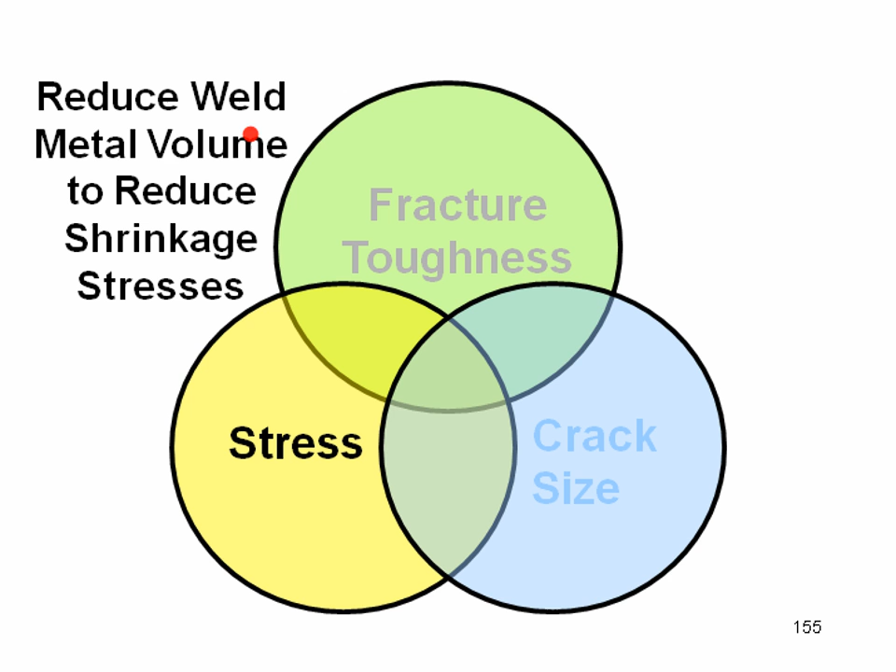These are residual stresses from welding, and if I can reduce the volume of weld metal, I can help reduce the shrinkage stresses. So this is where we look into the detailing. Should a single V-groove weld or a double V-groove weld be used? The double V typically has less weld metal involved in the joint, and that's going to be helpful to us.

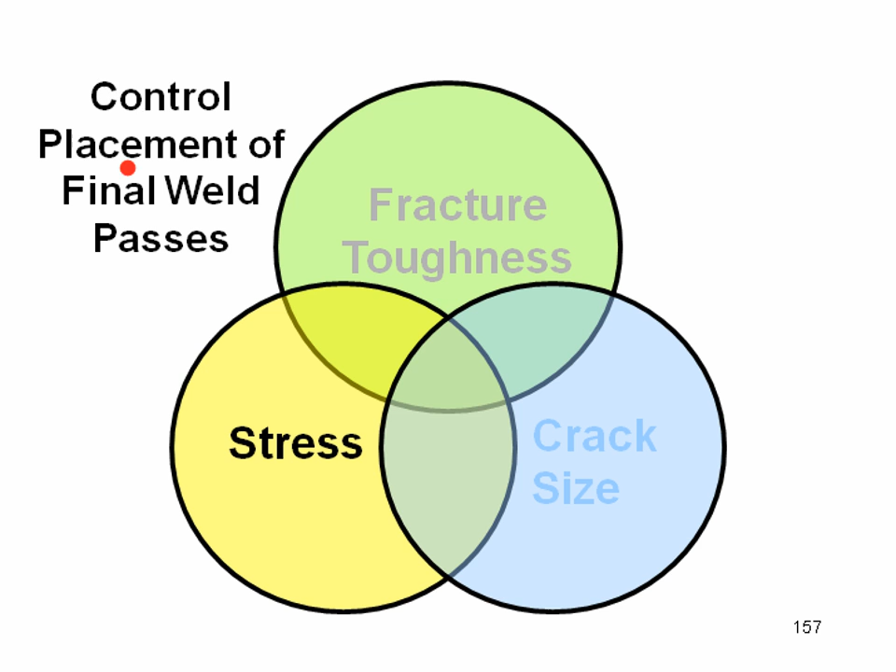Another issue is remembering that the last weld pass has the most significant tensile residual stresses, so by controlling the placement of the weld pass I can improve the situation. Notice this weld has been made on the inside of the shape first. When it's flipped over and welding starts on the opposite side, the members with the highest residual tensile stress are placed out away from the weld access hole area. So the problematic high tensile stress welds end up away from where we're cutting through the core and making the weld access holes. I'll suggest you may want to do some overhead welding so the last, final stresses are out away from the region we know to be somewhat problematic.

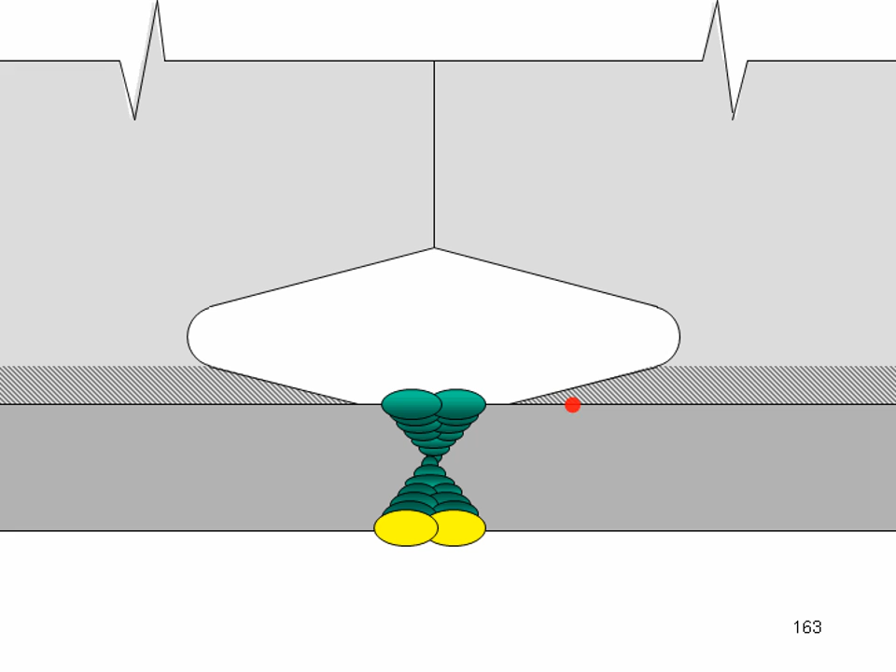Now the third thing on our circle was the crack size. For fracture mechanics, the best thing we can do is make the crack size zero—get rid of the crack.

That's why AISC now requires that we make the access holes differently. We preheat the steel to 150 degrees for thermal cutting—this is for the jumbo sections. After you cut the access hole, it's ground to bright metal, and then inspected with dye penetrant inspection or magnetic particle inspection. The goal is to start with crack-free surfaces.

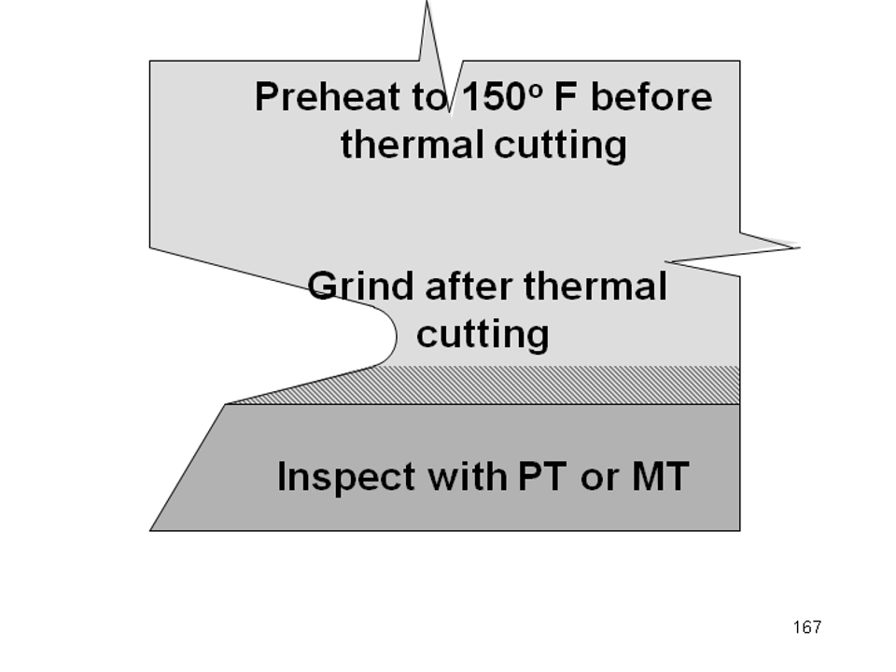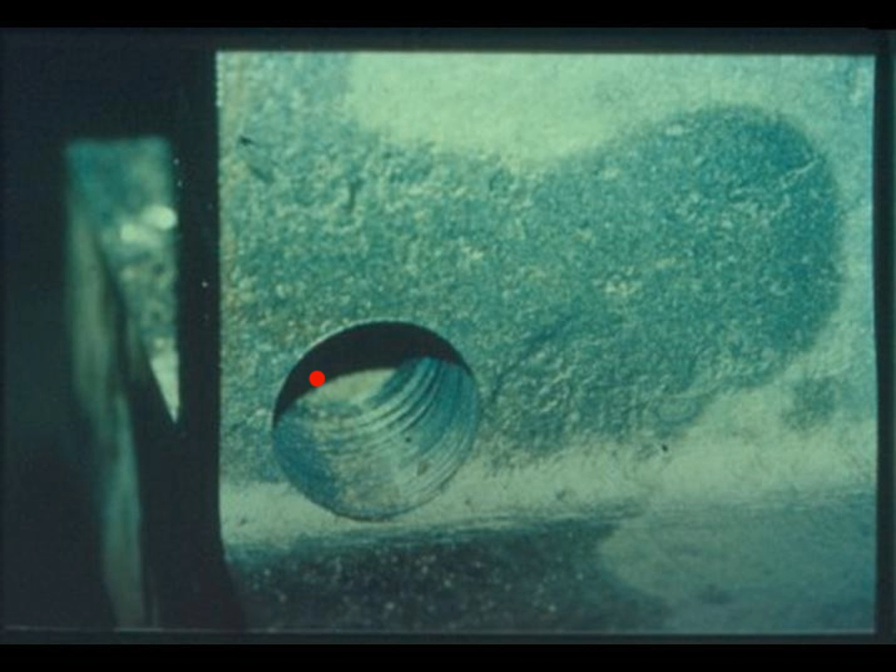That has brought about an alternative practice that I like: using your drill line to create the hole that will constitute the outside radius of the weld access hole. This particular shot was taken before these weld access holes were made bigger, so this would not comply, but it shows the drilling of the hole. After drilling the hole, it's a simple matter of extending that by flame cutting, removing the material, and then you don't need to grind the radius region.

I think we have a question. Yes, Dwayne, we have a question regarding thick base plates: is lamellar tearing still an issue with thick base plates when full, complete joint penetration welding to columns occurs?

The answer is yes, it still can be. I'm pleased to say that lamellar tearing problems in 2009 are much less than what we experienced through the 70s and 80s. That's in part due to changes in steel mill practice. But we still have some lamellar tearing concerns, and large welds that strain the material in the through-thickness direction are always problematic. Lamellar tearing seems to be most closely associated with welds right on the edge of the plate. For columns to base plates, we usually have edge material extending beyond the edge for bolts and so forth, which should be less of a problem than, for example, in corner joints of fabricated boxes. All right, so I hope I addressed that issue.

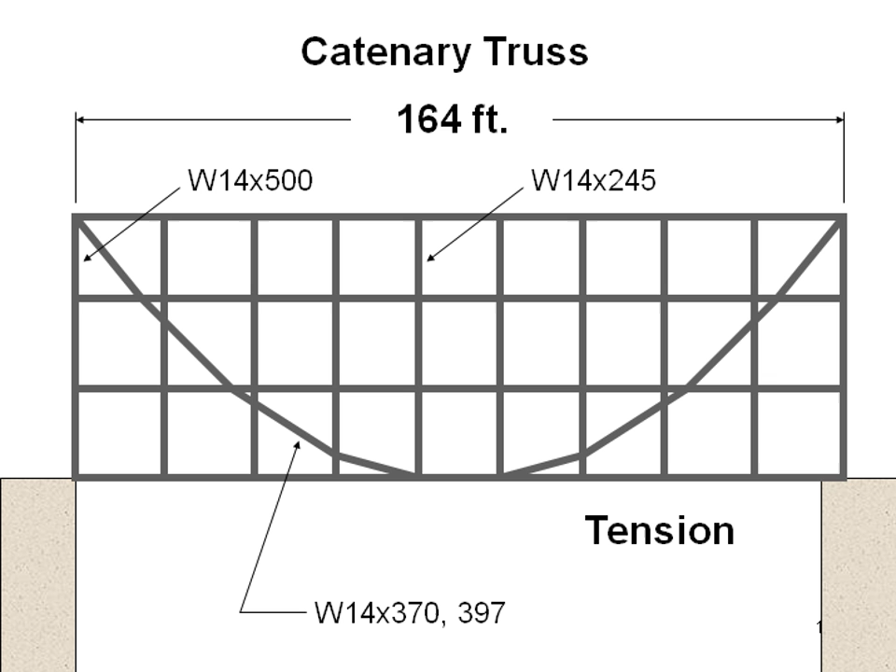Now here we see the layout of the truss in the shop. You can see sometimes there was a double catenary that straddled the columns in the system. The field connections were very carefully selected. The complicated connections were made back in the shop, and in the field we had simple butt splices. This photograph helps illustrate this concept.

If you look at the node up here, you see that the connection, which will be the catenary to the column, has already been made in the shop. And so in the field, we have a simpler butt splice where this stub is welded to the member that's going to be added in between.

Now this is obviously taken after construction has progressed, and you're starting to see both the catenary and the Vierendeel truss. In the center of the building, there is an open atrium area, which we'll look at a little later on. And there you see the catenary in that system.

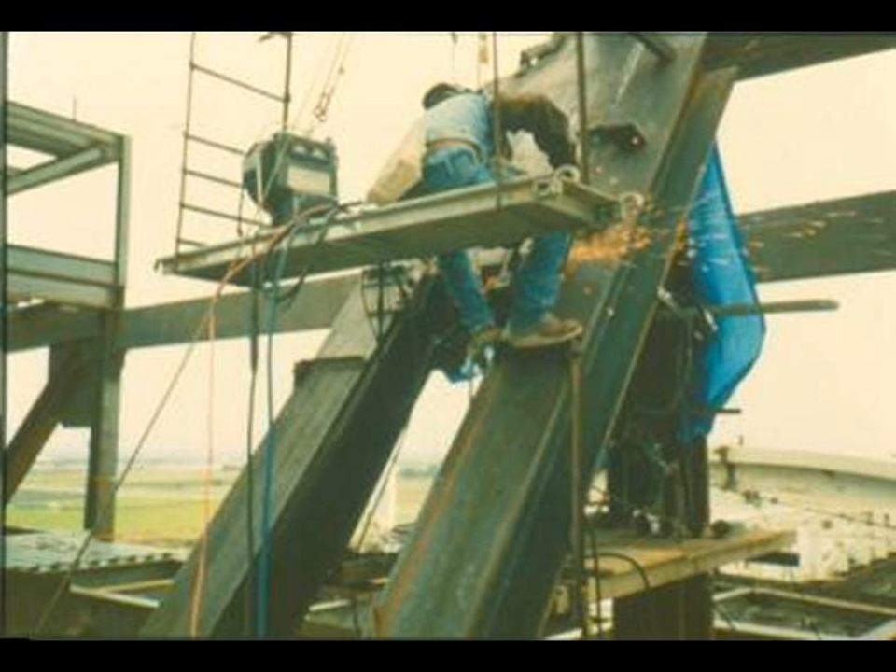This is part of the double catenary. Again, the complicated connection was made up in the shop. I think this is a grinder, not a welder, but the field connection now is moved away from the column where the welder has better access, and we have a more simple type of weld to make under field conditions.

Now here we see a little bit of the transition between the chords that have been added in the field and the shop welded connections, and then eventually this goes to a large weldment that was built up down here at the bottom of that catenary.

And as we look back on the campus, you can see now the weld access holes, the relatively large size of the access holes, and of course those were left open after they served their function of helping the residual stresses to not interact one with the other.

As we near completion, you can see through the glass the catenary is part of the architectural element, and indeed the atrium that we looked at before left the truss exposed, including the catenary that's been boarded in as part of the fireproofing system. This is simply to illustrate that these materials can be successfully welded.

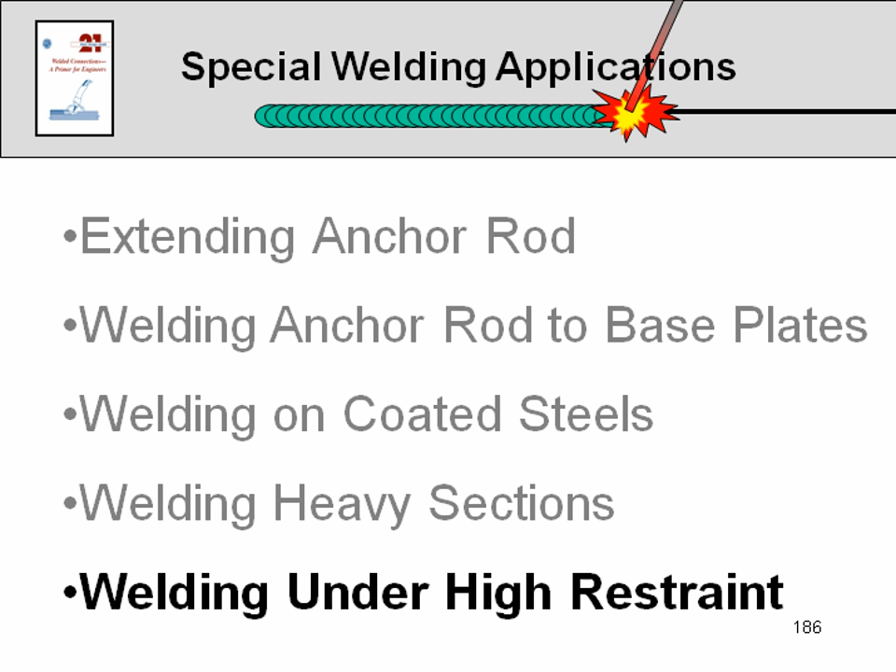We do need to go through all the proper techniques and make sure we employ good practices. In a very closely related topic, we have welding under high restraint. When we have high restraint, we need to increase the fracture resistance, reduce the shrinkage stresses, and reduce the restraint.

In Design Guide 21, Chapter 12, you'll find all of these items not only listed but amplified upon in the section on welding under high restraint. So I'm going to simply hit the highlights. We need to increase the fracture resistance. The most powerful way to increase fracture resistance is to avoid cracks and notches. As soon as our crack size becomes zero, we don't have a fracture mechanics problem.

Now, of course, we need to use materials with defined notch toughnesses. Higher preheats help us in that regard. Anything we can do to reduce the shrinkage stress is helpful. I'm frustrating some of you by not reading this, but I'd like to suggest that your time should be spent reading the material in the design guide.

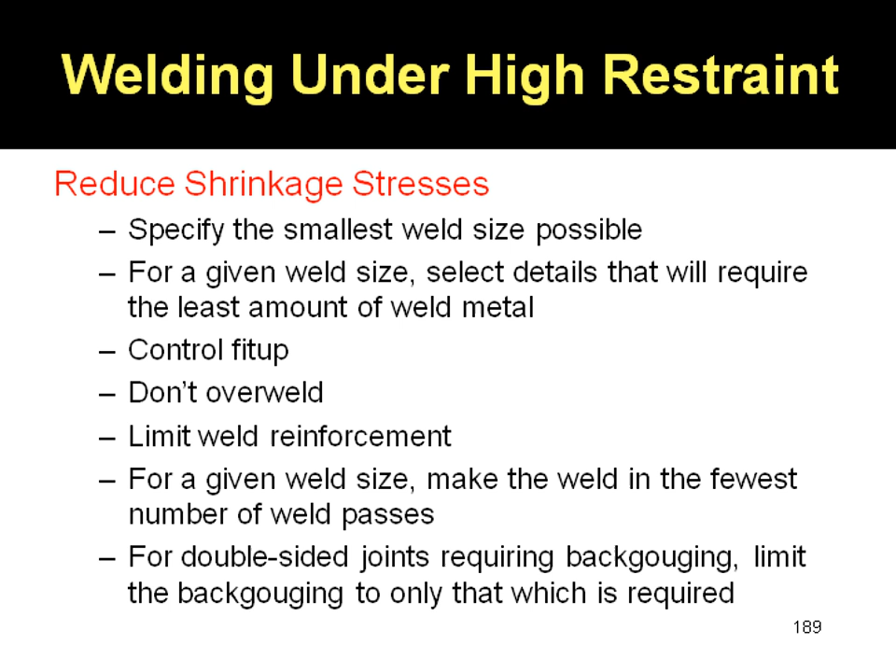We want to reduce shrinkage stresses, and you have a whole list of very practical ways to reduce those shrinkage stresses. We also need to reduce the restraint as much as we can. Again, at the risk of frustrating you, the design guide goes through these ways to reduce restraint and gives you a lot of practical ways to accomplish that purpose.

Now we're going to move on to the second listing of 5 items and hopefully wrap this up in the next few minutes: welding on HSS. One of the things I'd like to point out quickly on HSS is that, unlike when we make connections, the connection design in HSS may affect the member size.

So you select the member size as engineers, but when the connection is detailed, you may find the connection requires you to change the member size. And that requires some interaction between the detailer and the designer when we get to HSS connections. I'm not going to say anything more about that, just highlighting some of the issues we need to be concerned about. We also want to look at the overall configuration.

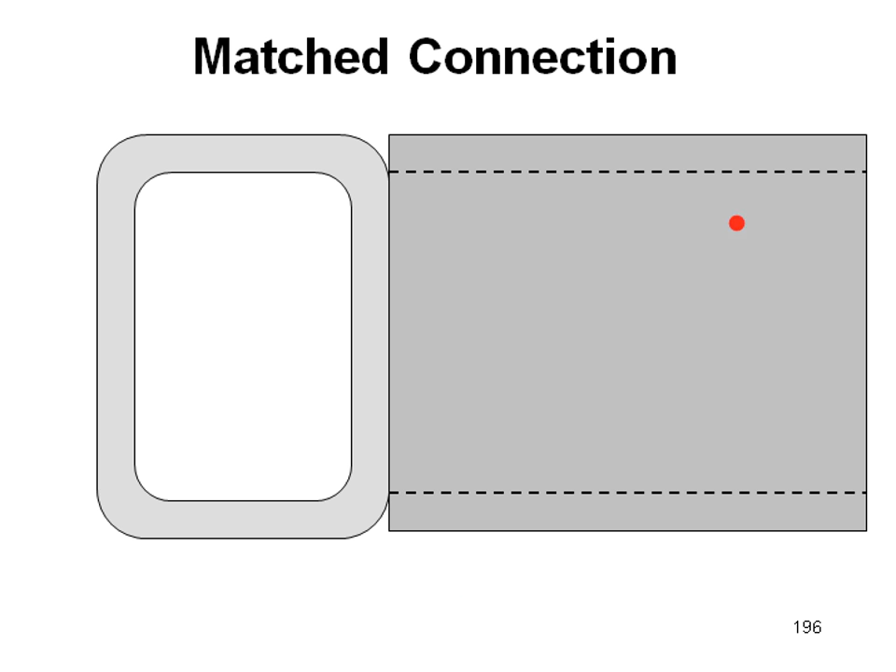Now, this is what's called a matched connection. In a matched connection, the branch member has the same overall size as the main member. In many situations, it's not difficult to make that flare V or flare bevel groove weld. But what if your main member is heavier?

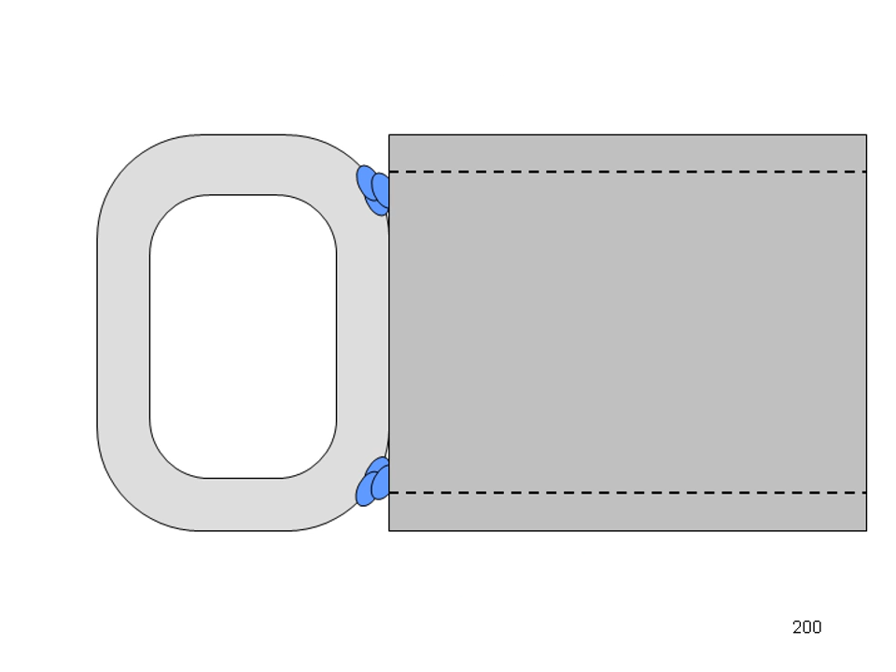Remember, the radius is going to be affected by the thickness of the steel. And now we have a gap in the root, and the welder's metal drips through the joint. To preclude that, maybe you'd cut a special piece of backing—that's more complicated. You could butter up the surfaces of the steel, grind it flush, and then bring in another member. Maybe you'll buy a special machine that cuts a special profile on the end of the shape to get a good joint detail.

But there's another option, and that's what's called a stepped connection, where the branch member is made slightly smaller than the main member. In doing so, it's simple to put a fillet weld all the way around the perimeter.

It's not the only thing we need to think about with welding. Let's think about an overlapped connection. Many engineers prefer this because as you go down the center line of your member, if you put the working point in the center of your chord, you don't have any bending to work with. That's normally very desirable, but I need to think about welding for a moment.

The gapped connection allows you to put a weld all the way around the perimeter very easily. It's easy to weld, easy to inspect. Of course, that means you're going to have to take bending loads through the chord. You're going to design that differently, and that may be a situation where the chord changes.

Also, while we're talking about welding, we need to try to provide access for the welder to get to the joint. That angle of a minimum of 30 degrees is recommended simply to allow the welder to gain access for making the weld, and to allow the inspector to gain access for getting the weld made.

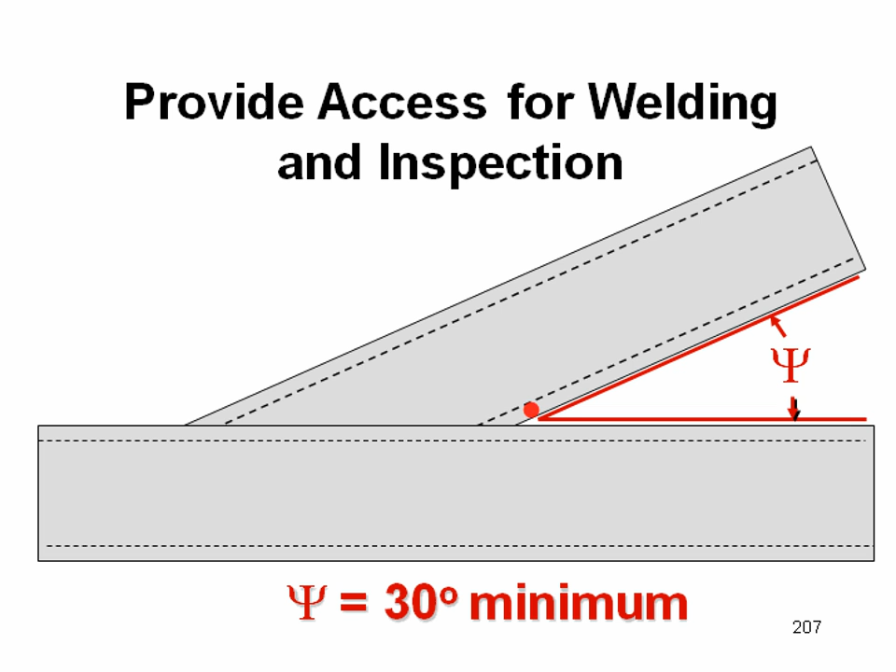While we're talking about HSS, I start thinking about cutting and preparing the material. When dealing with box sections, it's very easy to make saw cuts to prepare the material. If we have trusses and diagonals coming in, it's very easy to make saw cuts on the box sections. When we have overlapped connections, we can make the various cuts required, but this is again an advantage of the gapped connection.

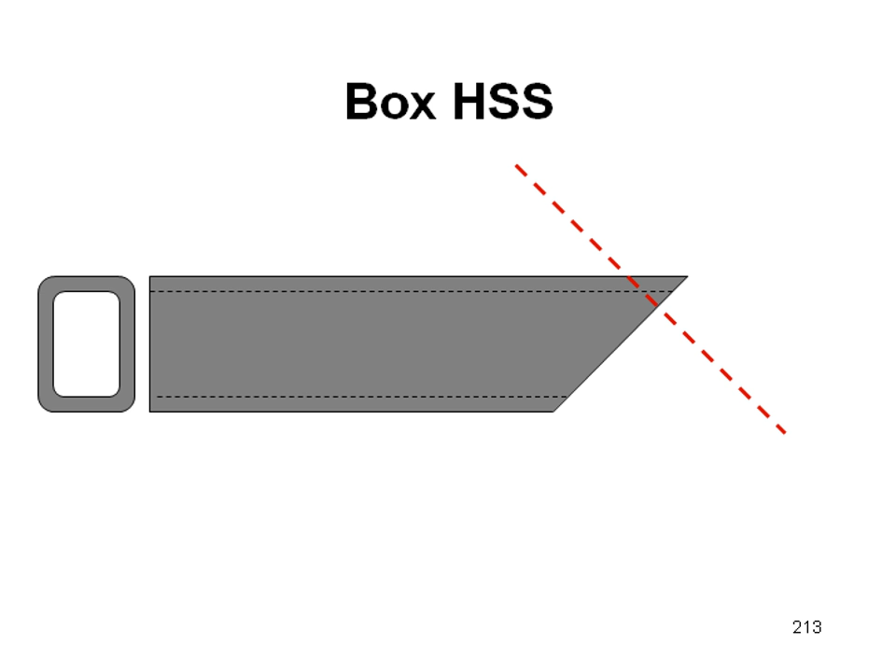You don't have to make but one cut. Overlapped connections require multiple cuts, and every cut adds the opportunity to create more fit-up problems in the field. That's for box HSS—saws are easily used to prepare the material.

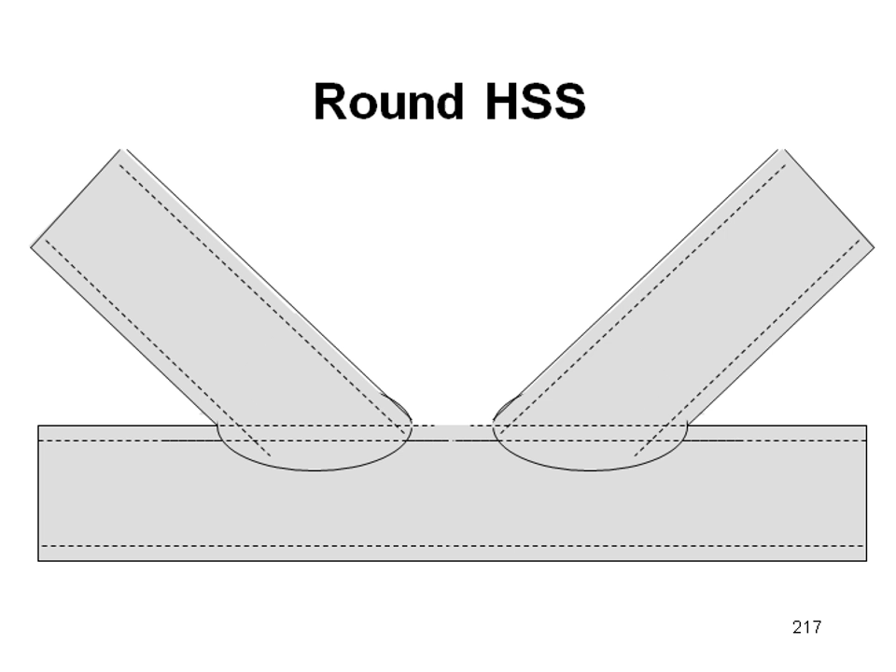When I go to round HSS, and in fact we even now have oval HSS, the joints are a little bit harder to prepare. Now I need to make these saddle cuts, which requires a more complex system. A common use of HSS is for architecturally exposed trusses.

When I'm using box HSS, I can start with an outside envelope of my member, if you will, and I can insert that diagonal, that transverse member, very easily. I can drop the diagonals in place—it's fairly easily accomplished. I trust you can see that when I'm dealing with round HSS, it's impossible to drop that member in place.

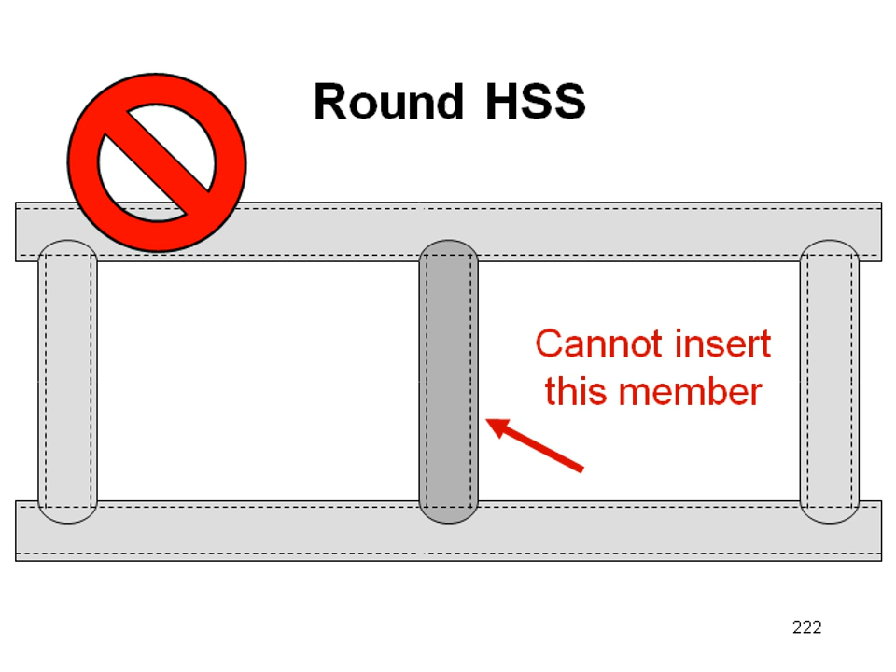Now, I can configure this as a letter E, if you will, and then bring in the chord. That's one solution to the problem. A commonly used approach is to cut that transverse member, and you put in this little bit of a transition splice. I make the weld to the chord, but then I have to make this repair in between. It's one of the tools that can be used.

My point is that if we welding people had our choice, we'd probably use box HSS. It's a little bit easier to prepare and fit. Now, I think we might have a question on box section or on HSS.

Brent? Yeah, this was in reference to one of the earlier slides. I believe it was where you had two square HSS members coming into each other. And the question is, can an HSS to HSS connection as shown, as I've described, be prepped for a true full penetration capacity versus a flare bevel / partial penetration capacity?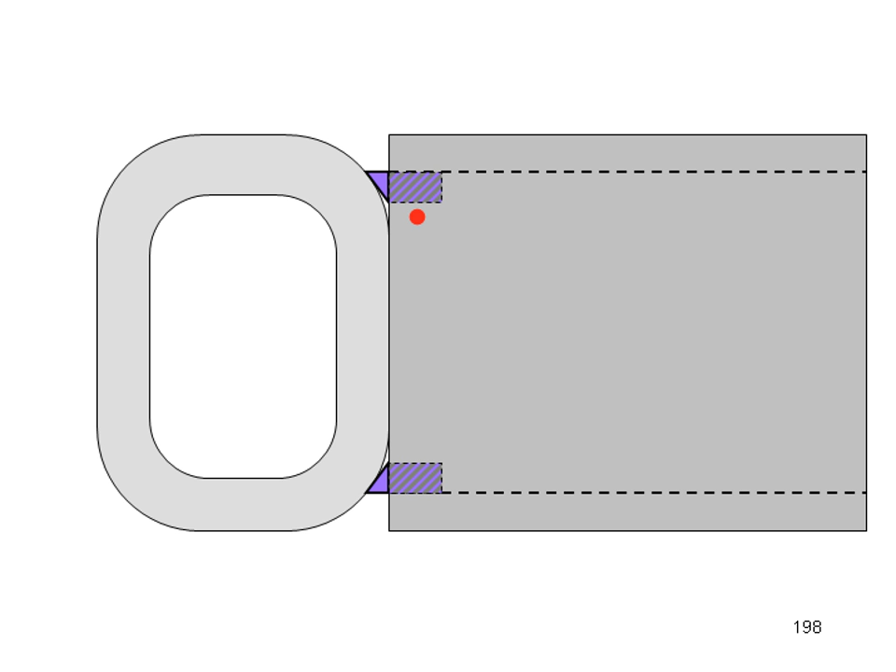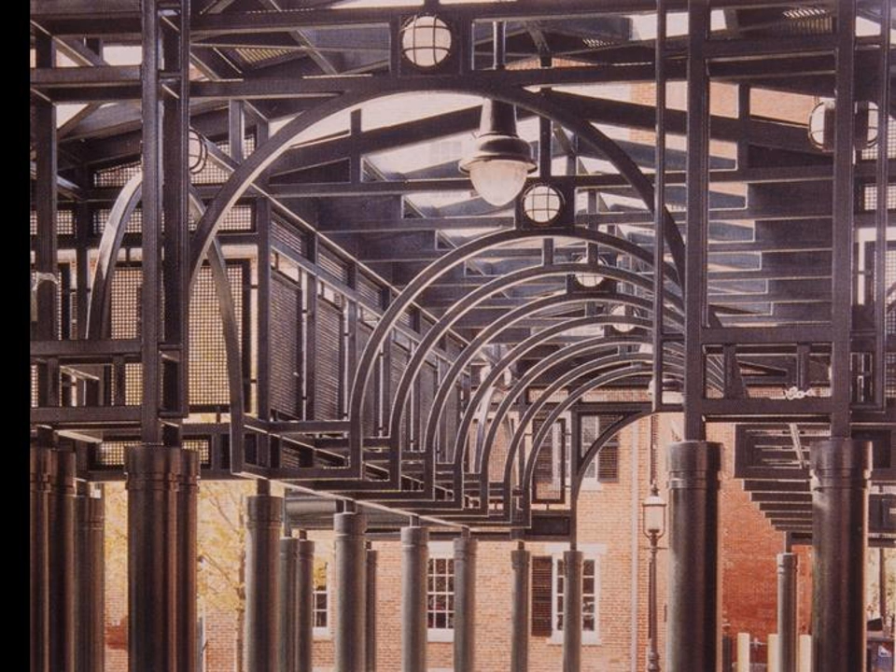Now I'm going to transition to AESS. And we'll start with some examples. Perhaps it was O'Hare Airport that we started to see the use of AESS in a more common application. Of course, if you start looking around, you see it in a variety of applications. It's a beautiful use of steel and certainly desirable in many kinds of architectural applications. Of course, my hometown is Cleveland, and our ballpark downtown, where our next to last place Indians competed this year, makes extensive use of AESS.

Now, when we start talking about AESS, we're starting to talk about levels of pretty. And pretty and beauty is in the eyes of the beholder. So I'd like to suggest that mock-ups should be part of your plan when you're dealing with AESS. You're probably dealing with an architect, and what you think is beautiful may not meet the architect's expectations. Making a mock-up complete with painting with the final kind of paint can be very helpful in avoiding future communication problems.

Now, the second point that I have, which I think is very helpful, when the architect is examining that mock-up specimen, it's appropriate to observe the specimen from the perspective of the observer in the actual building. That is, if the truss is going to be 30 feet up in the air, then the mock-up ought to be examined from a distance of 30 feet. Because what I could see from a distance of a foot, what I can see from a distance of 30 feet would be quite different.

Now, there are a variety of notes that need to be communicated to the fabricator and to the inspector, and I'm going to be talking about those. There are also some technical issues that you need to be aware of when it comes to welding AESS.

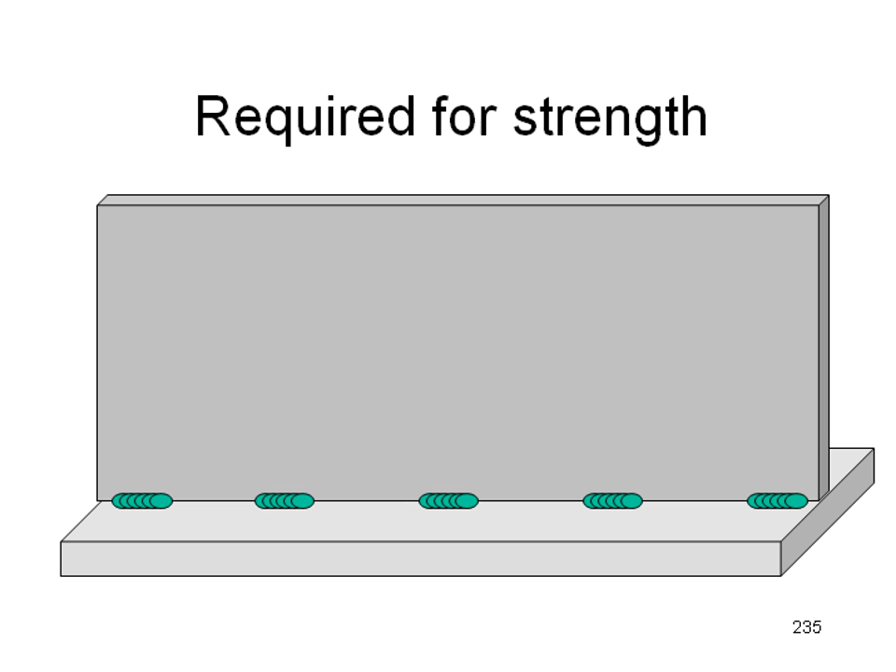Now, here's an example where intermittent welds may be adequate for strength, but for AESS, the architect wants a continuous weld. The continuous weld is going to cost more, and you're going to have more distortion, and I dare say it's probably lower cost for you to use caulk in between the welds than to weld it up. And if there's no reason for you to weld, maybe caulk makes sense.

Now, here we have an example where the code doesn't allow us to weld on the corners. But if we have a painted structure, and particularly if it's painted white, we're going to get bleed out at that location, and we have a rusting problem. So for AESS applications, it may be desired to weld all the way to the corner. Now, we need to make sure when we do that, that we communicate to the inspector that this is the expectation. Otherwise, you're going to have a dispute. The inspector's going to say, no, you have to interrupt the welds at the corner.

The concern is getting consistent quality in the corner, and that's another issue that may need to be addressed.

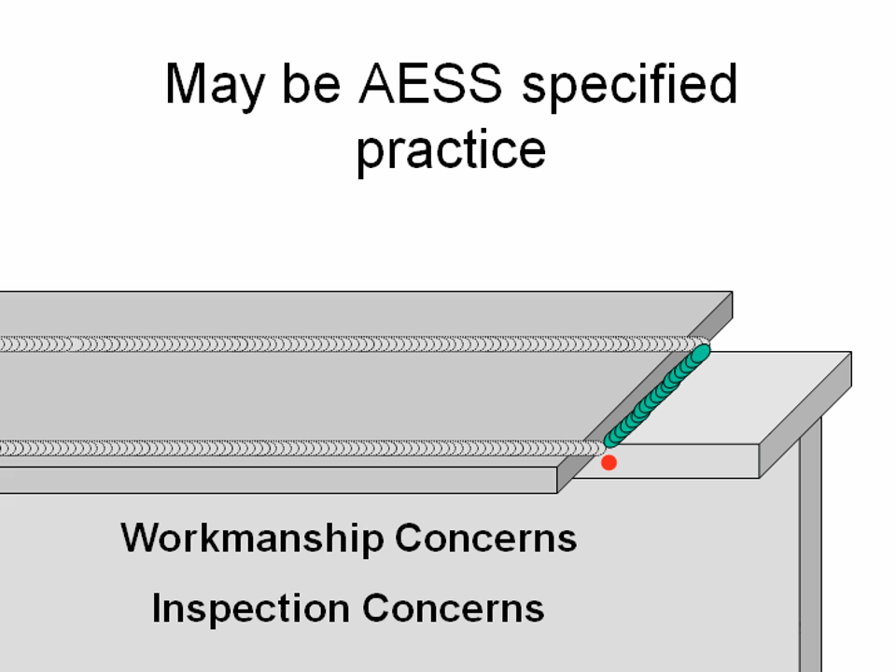We just talked about the importance of weld access holes. We made a tension splice successfully, but maybe the AESS requirements say we don't want a weld access hole. Well, we can't get the groove welds in place without the access hole, so that's a non-starter. But maybe somebody says we need to put a plug in here, and it's easy to say weld the plug in place. Now we're adding more residual stresses into the region, and I don't think that's what you want to do.

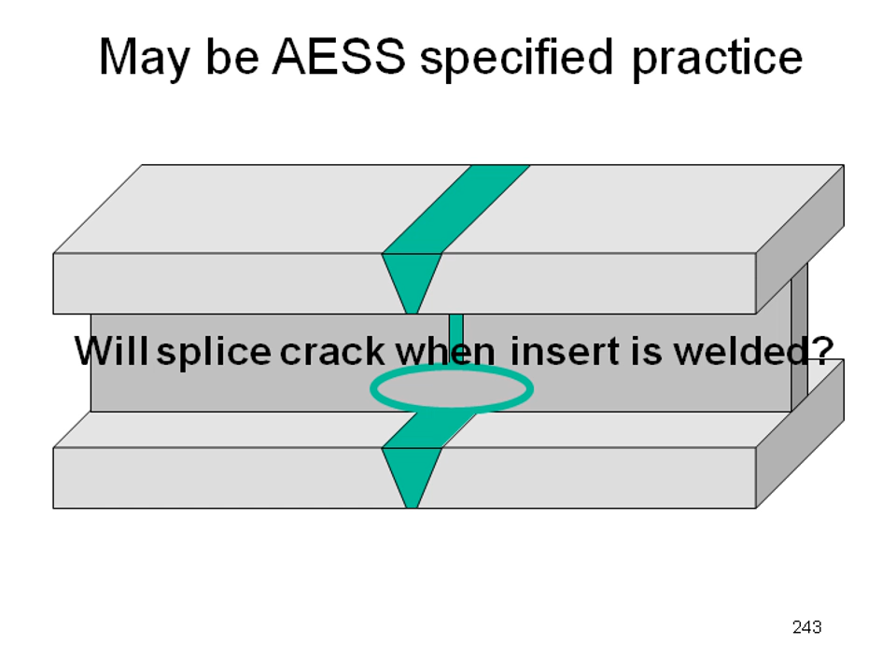This is a location where maybe you bolt something in that area, or maybe you use some mastic fill material and put it into those locations. What tolerance or distortion is acceptable within D1.1 may not be acceptable for AESS. These are all things that need to be defined and communicated to those involved.

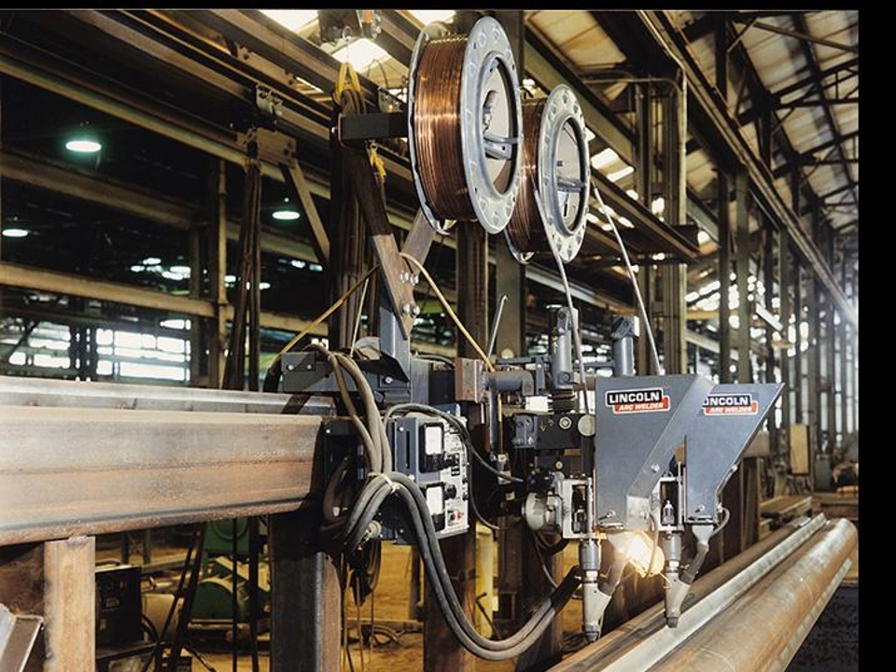This was a shopping mall down in the Carolinas, and the architect wanted a cast iron column look. You see the combination of round tubes and angles that were welded in. They wanted no starts and stops in the weld. Submerged arc welding was used because it could be automated, has no starts and stops, no spatter, and made for an excellent appearance to these columns.

AISC has a document showing the details of how to get that. Go to the website, AISC.org, and search AESS, and you'll find this document. In it you have a list of various variables that might be part of the AESS specification, as well as suggested applications where you might use these. It even supplies estimated costs for the premiums associated with this, and this document can be used with your architects as you work through those applications.

Welding on existing structures. When we weld on existing structures, we're dealing with historic steels, and it may involve steels that aren't made anymore. For those of you who have Design Guide 21, on page 62 there's a review of various historic steels from the perspective of weldability.

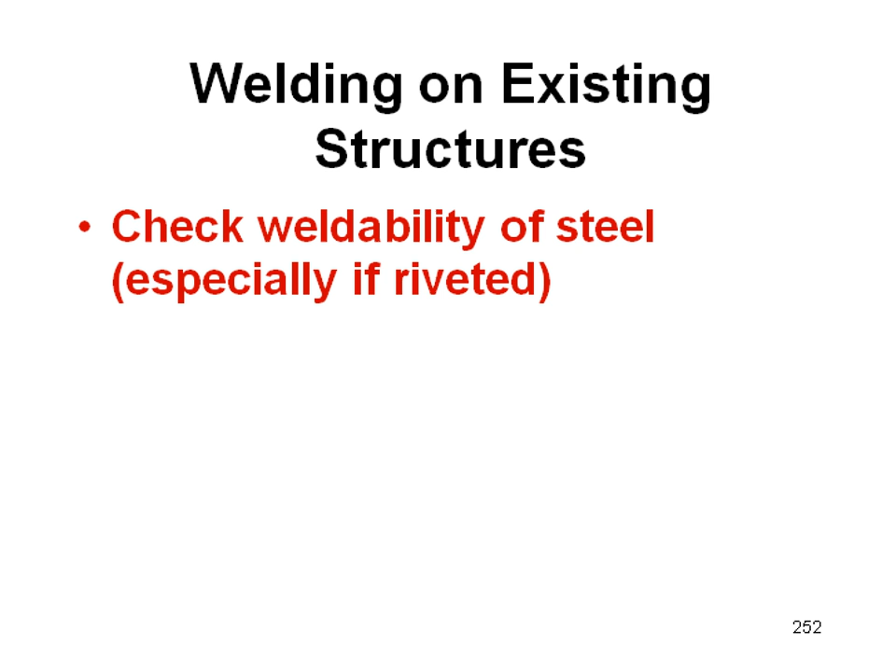You get the steel analyzed. The design guide can give you some general trends, and you need to look into that weldability. Now, we also have the issue of welding on structures under load, and there's always a concern about loss of section properties under those configurations.

Here's the issue. You have a weld, it's heated the steel, and the steel has lost some section properties in the process, lost some yield strength, and let's say we couldn't shore. Now what are we going to do? Well, maybe you can analyze this and assume the complete loss of the flange. That's okay, but I suspect you'll find it doesn't work.

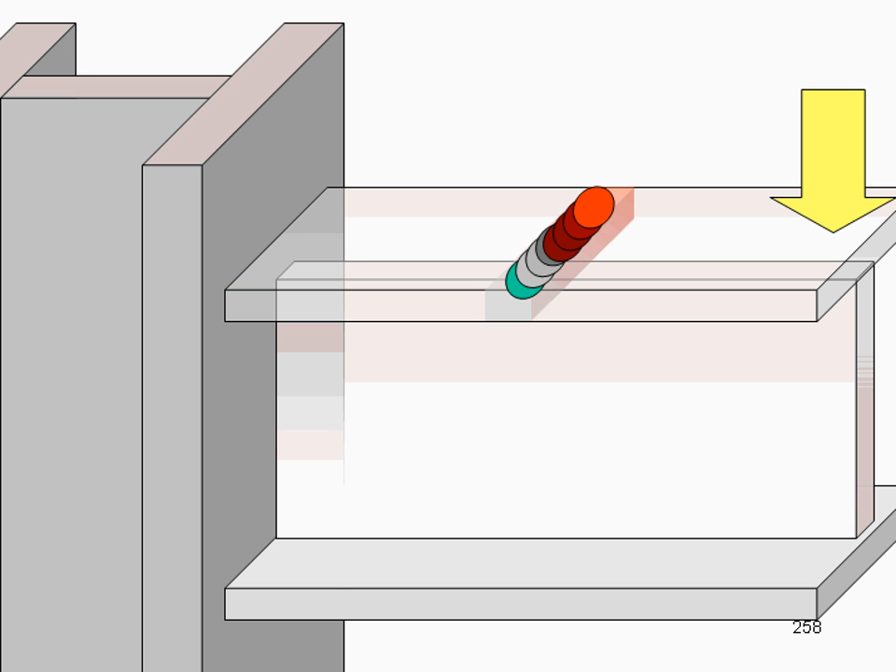So maybe you say the whole length of the weld isn't hot, and maybe I just consider half of the flange gone. Once again, that makes sense, except that it probably won't work. So let's examine this heated region a little further. Some people over the years have said, don't put in transverse welds, put in longitudinal welds. The idea is that we have less cross-sectional area affected by that.

And of course, surrounding the arc, immediately next to it, we have a very hot zone, but it doesn't take too long before it drops down on either side.

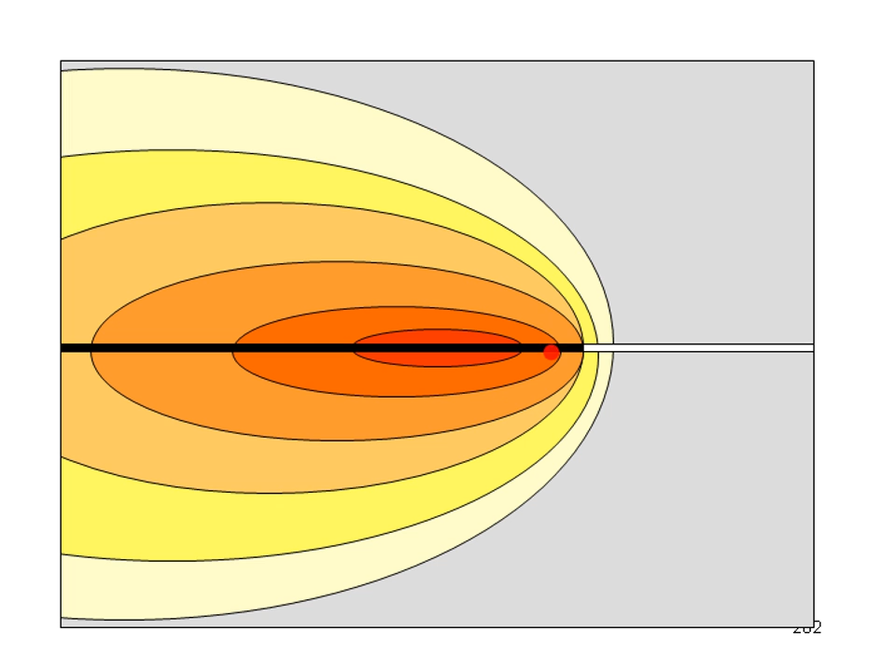And I say you need to check every situation, but these are some general trends that might be helpful to you.

Another concern is that of fire. The issue of fire is not only the combustibles in the area, but also the work leads associated with the welding arc.

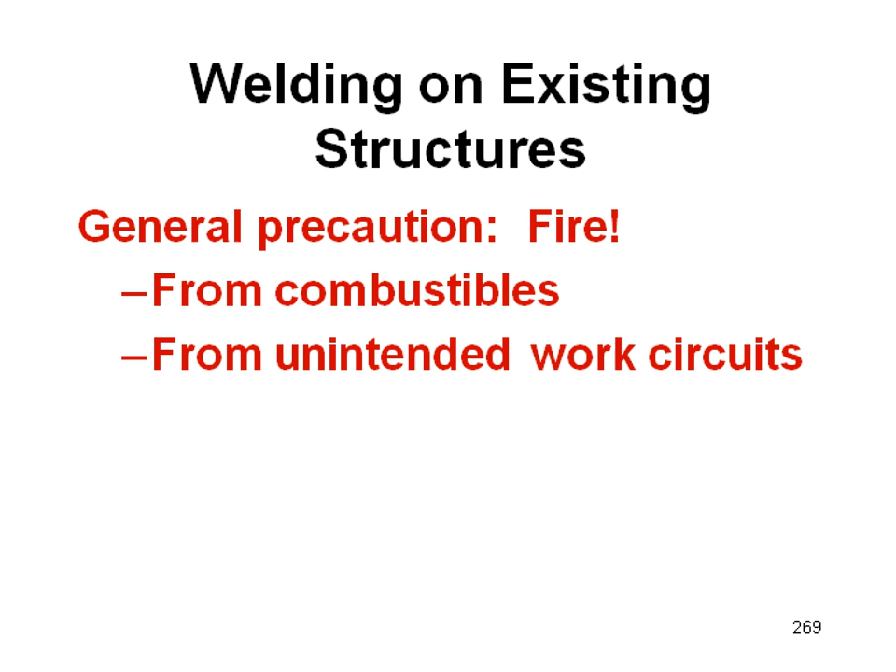Now, the next issue we have is welding on cold-worked material and strain aging. Many times we're dealing with structures that have been deformed due to service loads or natural forces—overload conditions, hurricanes, maybe even seismic events—and we could find ourselves welding on cold-worked material.

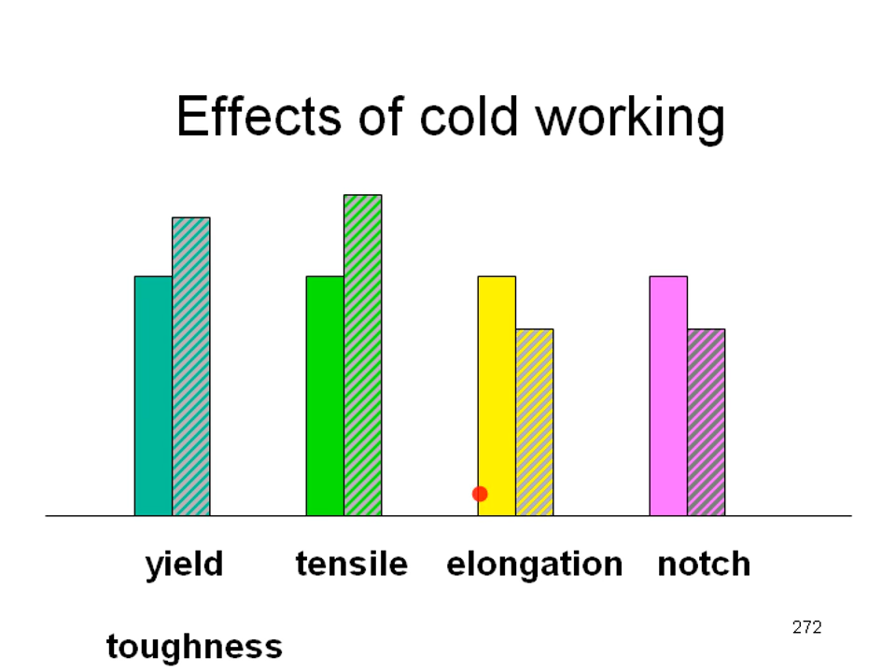Now, these bars represent the properties of hot-rolled steel. When we cold-work steel, we increase yield and tensile, but we decrease elongation and notch toughness. With that decrease, we need to be concerned about the properties of the steel we're welding on.

In addition to what the cold working is doing, we have this phenomenon called strain aging. Strain aging occurs when we heat steel between 400 and 700 degrees F. The yield and tensile further increase, while the ductility and notch toughness further decrease.

So again, we have our hot rolled properties, our cold worked properties, and now the strain aged properties. And I'm concerned again about the loss of elongation and notch toughness. The amount of strain aging we experience depends on the chemistry of the material. Stress relief can help, but that's impractical.

So what I'd like to suggest is that when we start welding on materials that have been plastically deformed, we need to acknowledge we have reduced notch toughness, and make sure the material starts out notch and crack free. So when we have these cold worked areas, let's get them ground real nice and smooth. Because we have reduced ductility, we want to minimize practices that increase the demand for ductility—and of course, we went through that under the provisions on welding highly restrained material.

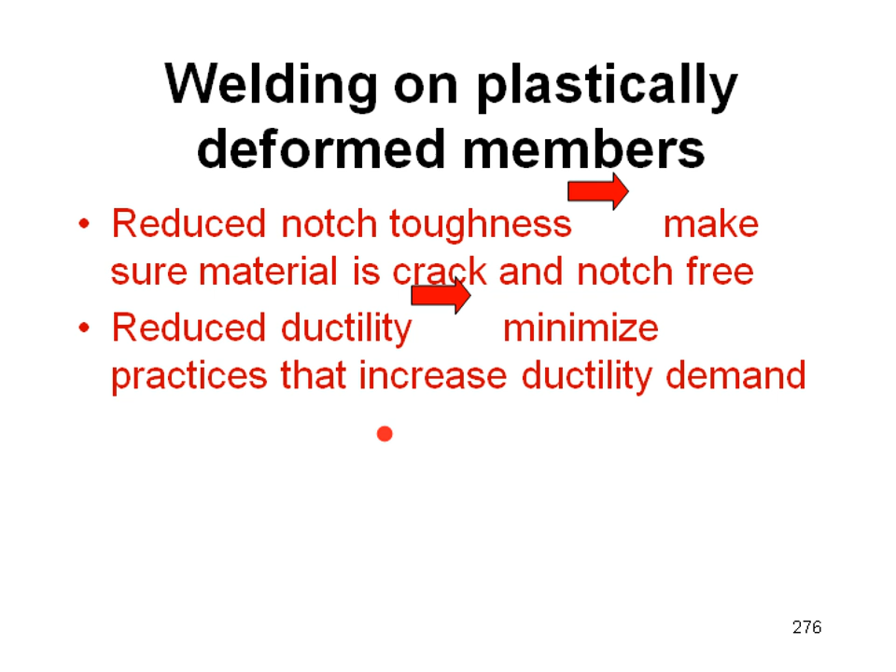Well, folks, we have gone past our limit, and I think I responded to a few more questions than we anticipated. So I think it's best that we wrap up our webinar, and we'll skip these last two topics of field welding and heat shrinking.